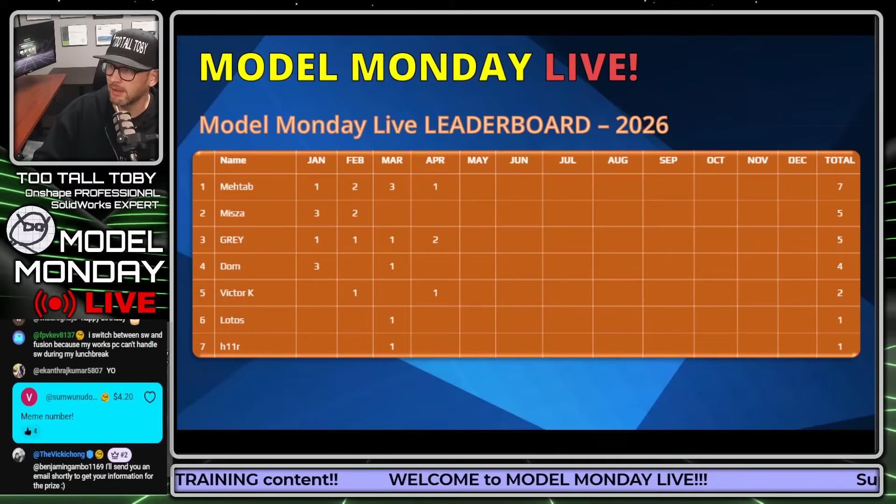So let's take a look here at this first challenge. I just want to warn you guys, this one is a little bit tricky. I think you guys are going to like this one. It's a fun one to kick things off here for this April 20th, this 420 challenge, but it's a little bit tricky. Watch the dimensions. Everything you need is there, but it is kind of a cool one. So let's get into it here.

As soon as I show the full print, you guys are going to be able to start modeling. So here we go in 3, 2, 1, go. And so the question here is, what is the mass of this part in 0.xxx pounds? This one is in inches and pounds. So what is the mass of this completed model?

So you can see here that the material is ABS. It's listed down in the title block. It's 1020 kilograms per cubic meter.

And you can also see here that the challenge, actually this is not a tier 1 challenge. I guess technically, actually, it could be. I'll leave it at tier 1, right? You could probably do this whole thing as one sketch and one extrusion, right? So that would make it a tier 1 challenge. So I guess we will leave it as a tier 1. You guys can kind of figure it out. You could definitely brute force your way through and do this all in one single sketch and one single feature.

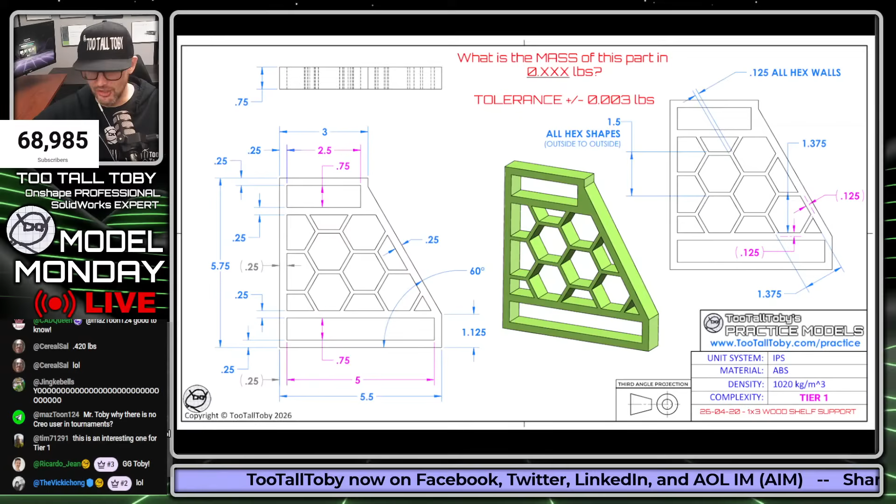Good start. Good start. There we go. That's the right direction. Maybe somebody just misclicked.

That was a test of the live feed. This is a cool model. I had a lot of fun doing this model, a lot of fun testing this model.

This is one of these things where you could print this out and it could become your own riser shelf. You could put some 1x3 down here, put 2 of them down here, and then put 1 of them up here, 1 inch by 3 inch, which in the United States we measure as 3/4 of an inch by 1.5 inches, or by 2.5 inches. So this one here would be for your 1x3 up in that top chamber. And then you've got yourself a nice little riser area. You could put some tools up there, some paints or things like that.

Still small enough that it'll print if you have a smaller print bed. If you have like the 150 by 150 print bed, you could still 3D print this. So kind of a cool shape. I saw this on one of the maker websites, I don't know where exactly.

Somebody had made something similar to this, but Tim says this is interesting for a tier 1. Yeah, I mean, it's complexity, not difficulty, right? So complexity-wise, you could do this all in one sketch. Realistically, you'd probably do it in 4 or 5 different features. At least I would. I would definitely break it up.

Instead of telling you how I would do it, why don't I just do this? Let's just do it, right? We'll do it, as they say on the internets, we'll do it live. Let's just do it live.

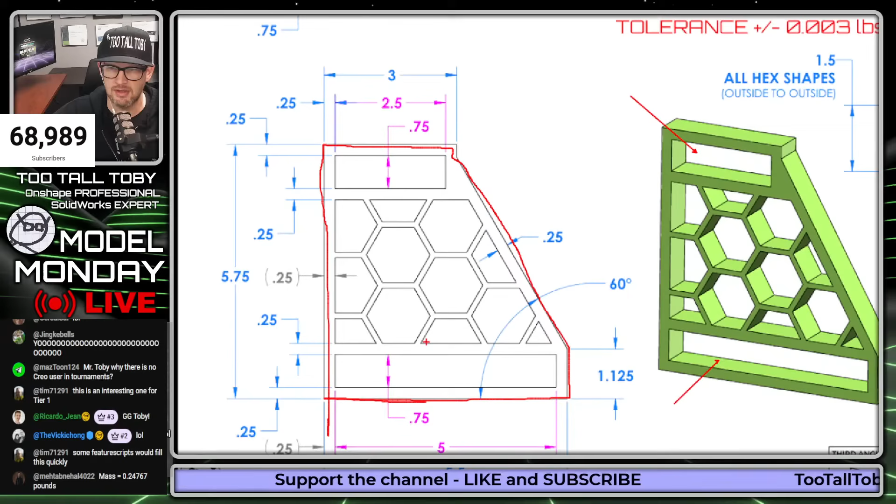So for me, what I would do here is, anytime I have a shape like this, I call it discretizing the model. What that means is I look at the challenge and then I break this up into different regions. I consider this kind of the outside shape of the model, so I would probably start out with that outside shape. Then I consider these pockets here the pockets for the wood planks, so that would be the next thing that I would cut into this. And then this area here would be like the pocket for the hex shape, so I would discretize that into its own shape as well.

Now you could do these all as the same sketch, or you could do them as separate sketches. The advantage to doing them as separate sketches is that a lot of times that allows you to keep your sketches simple, and when sketches are simple, they're easier to troubleshoot and easier to work on later. The advantage to putting it all in the same sketch is that sometimes it's easier to create relationships between the two. So you have a couple options, but I think I would probably just straight discretize this into different shapes.

So if I bring up my screen capture tool here, let's put this over here, and then we put this over here, just so I've got a view of that drawing. What this might look like is, in Onshape, I would come up here and say I want to use the correct unit system. So my workspace units here would be inches, and then my mass would be in pounds. Then I would go front plane, begin a sketch, orient my view, and then I would create that first shape.

So I would come up here to 5.75, and then over here to 3 inches, then come down with a little notch, over like this, and down until I'm horizontal to the origin. The cool thing about Onshape is that it gives preferential treatment to the automatic relationships being added before you add your dimension. So when I drop in this end point of this line and left click, then I can type in 1.125, enter, and it pushes the top of the line up instead of dropping it down below, maintaining that horizontal and vertical.

Tim says some feature scripts would fill this in quickly. Yeah, that's the way to go, do it with a proper feature script. There's probably an opportunity here to maybe use Vent or another feature script. Victor will have to let us know in the chat if he was able to use Vent or another feature script there from Onshape. It was super clunky, definitely wasn't the smoothest approach.

Probably the most popular fidgety type tool we have on there is the 3D printable hex bolt and hex nut. If you don't have one of these yet, check out the TooTallToby practice models library - we have these available for you to practice modeling, and then you can 3D print it. What's fun about this one is that when you first print it out, there's often a little bit of filament in the threads, so you have to cycle it 20 or 30 times, and then it starts to get very smooth and becomes a very addictive fidgeting toy. Definitely a cool one to check out.

A lot of times 3D printing people or structural people will say it's not right, it's not correct, you didn't print it in the right orientation, it's not going to be strong enough, it's going to snap off right here at the shaft. While I agree with those things from a structural point of view, you can't argue with results - this thing is very fun to fidget with. If you print these out and give them to your friends and family, they will agree, and they will also be fidgeting with these.

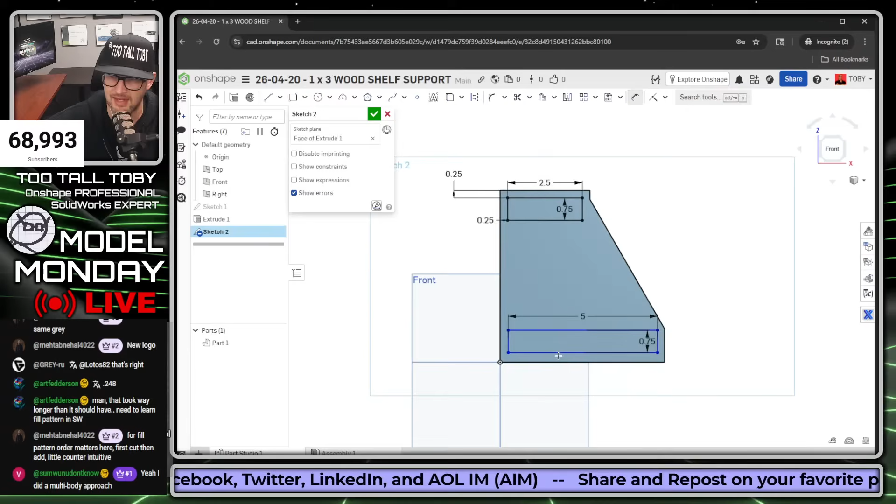It's really easy for me to create those shapes and then lock them into place relative to the other geometry when I've discretized that out, made the geometry a little easier to see and work with, not too complicated, not too many entities. When you get too many entities in one sketch, that's when things tend to get a little dicey.

So that's what you want to avoid, having too many entities in one sketch. If you created something like this, it would be easy to take that shape and do a remove, making that remove through all. So this feature might be called main shape, and this one might be called pockets for boards, or pocket for planks, something like that.

Then we could easily get in here and create this final shape. This one's just going to need dimensions and sketch relationships. So this line here and this line here are going to be parallel to each other. This line here too — I thought it was Shift B for parallel, but it's just lowercase b. And then the remaining lines are just going to have the relationship of 0.25.

So even though it takes more features, this is definitely the way I would model up something like this. It's not only going to help you get your initial shape in place, but it's also going to help make it easier to rework this thing, and having these discretized features makes it easy to link them to a variable table or something like that, just because they're discretized.

So this could be called pocket for hex, pocket for the hex shape. Now we get into the hex shape, and this comes down to each person having their own style, their own approach. For me, whenever it comes to creating any type of pattern, I always end up making the pattern oversized — imagine each of these other things I create is going to be a hex in the pattern. I always create it oversized, where it overfills the pocket region it needs to fill, and then I cut away the excess geometry.

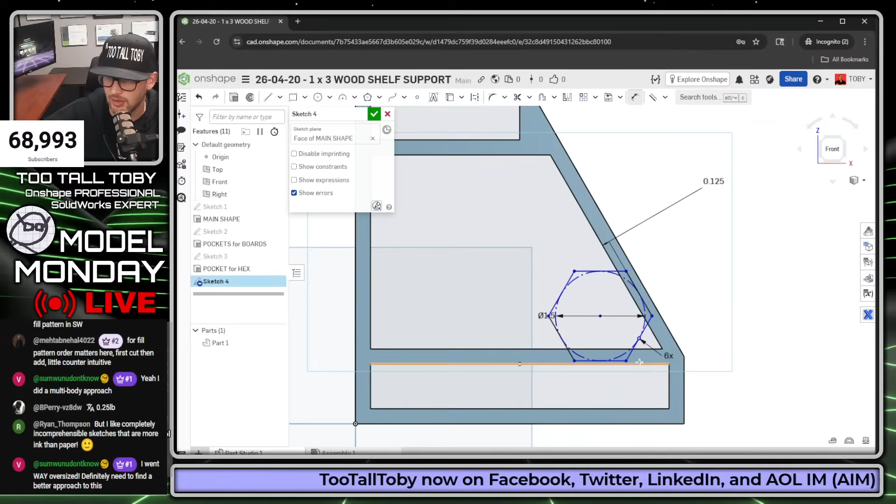Add that parallel relationship again, and then add in my dimension here — from this line to this line, that's going to be at 0.125. So that's the overlap for the hex, and the dimension here is 0.125. Now look, that hex is nice and fully constrained.

Now, a little pro trick here: if I know I'm going to be creating a hex type of pattern, what I'll typically do is get in here and add some additional lines. These lines are going to assist with my pattern — I could create a line here like this and a line here like this, and we'll see how those are used in just a moment. I might choose to make those lines construction, but that's a lot of times what I'll do when getting ready to create some type of hex shape.

So now that I've got that shape ready to go, I'll extrude it, but using the thin option here, and then I'll pick on that sketch 4.

So that's going to get extruded thin. What's the wall thickness? 0.125, and that wall thickness is going to the inside.

And then what's the depth of this thing? Well, I could make this depth up to surface, so this could just go here for the depth. I can make this up to surface or up to vertex. I'll make it up to surface here like so. And then I'm going to say that I want this to be a new part in my parts list.

So down here, I've got this parts list, and you can see that because I chose new, I'm ending up with a new part here in this parts list. And so this is kind of a good way if you know that you're going to overfill it and then need to cut it away. This could be a good way to do it.

It also tends to make it pretty robust, because if the pocket changes sizes and you need to overfill it more, the cut still works, at least in my experience most of the time. So hit the green check mark. There we go, that gives us that shape.

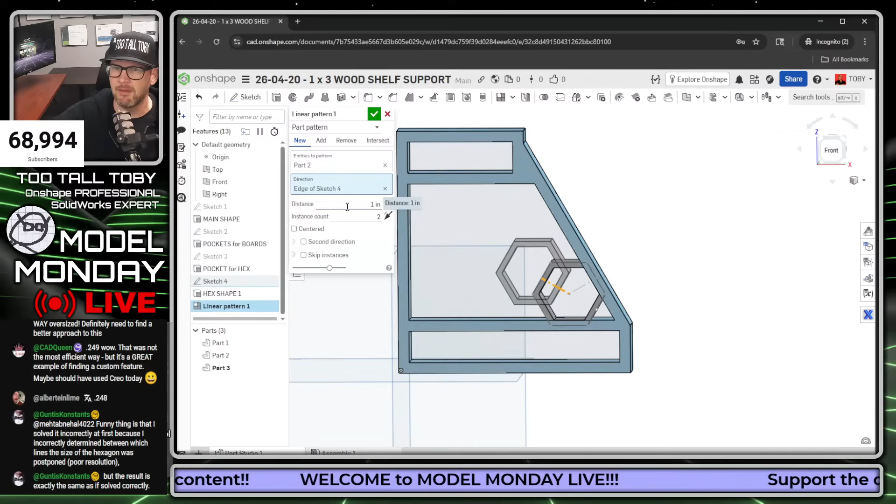Now, the pattern's not going to be at 1.5, because that would be like a double wall thickness there. It's going to be 1.5 minus 0.125, so 1.375, 1 3/8. So that gives me the direction of that pattern.

And then I just need to put in enough instances that this thing fills or overfills. So for example, I could put in 5 instances of this thing, and that way it kind of overfills.

And so now that I've got that shape in place, what I would do here probably is I would just finish that pattern and then make another pattern. So create another linear pattern here of all 5 of these. Okay, so we just grab all 5 of those bodies.

And then for the direction, now we can go in this direction, the second direction from our layout sketch, which is going to the midpoint of the hex. So the second direction for that layout sketch. And then the distance, again, is going to be 1.375.

And the cool thing about Onshape is that you can choose this option for centered, and that way it pushes it off in both directions. Now, again, this is kind of overfilled.

I am kind of future-proofing this a little bit, because if that pocket ended up getting bigger, I'm giving myself that flexibility, that reusability. So if I wanted to make 3 or 4 different sizes, I could overfill this and accomplish it that way. There's more than one way to accomplish it, but this at least gives me play for a little bit of a larger pocket here.

Maybe what I could say in my planning here is I could say, well, I might end up with a situation where I've got 3 boards across the bottom. Each one of the boards here is 2.5 inches. So maybe I want to account for having 3 boards across the bottom and 2 boards across the top. So in this scenario, it looks like I'm pretty much accounting for that.

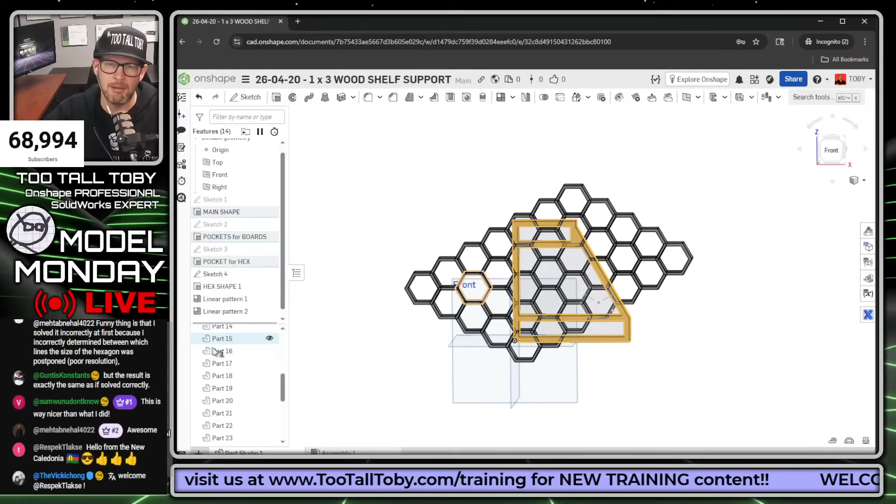So once you've got that stuff in place, what I would probably do at this point is just choose to union this to make it a little bit easier to do my cut. I mean, you could do it the other way with an intersect. That would certainly work as well, but we would want to do an intersect and not include this body. So maybe what I would do at this point is just take everything other than this first body.

So this first body here, or this first part in the list, this is the main shape. So if I rename that to main shape body, now what I can do is take the rest of these. Pick the first one, hold shift on my keyboard, and go all the way down to this bottom one. Then right click, and choose union, Boolean union. So that combines them all together into one single part.

And now what I can do is take the sketch that I had originally used here, or I could even just pick in this region. This is the cool thing about Onshape, is that it does a good job of letting you just pick a region, but I could also just go to that earlier sketch that I created. So this is the pocket for hex sketch. I could take this sketch, which is the one I used for the pocket for hex, and then do an extrude.

So now you see I'm doing an extrude from that pocket. Just to make it clear what's happening, if I change this to a solid and choose that sketch from the pocket for hex, you can see here what that region is that I'm extruding. But instead of doing it as a solid, I'm going to do it as an intersect here.

And then for the intersect, I'm going to choose to merge with part 2. That's this part here. And then also I'm going to choose to merge with this. There's one extra little part that's hanging down here that didn't get included in that union. So let's see if I can merge it with both at the same time. Ooh, not going to let me merge with both.

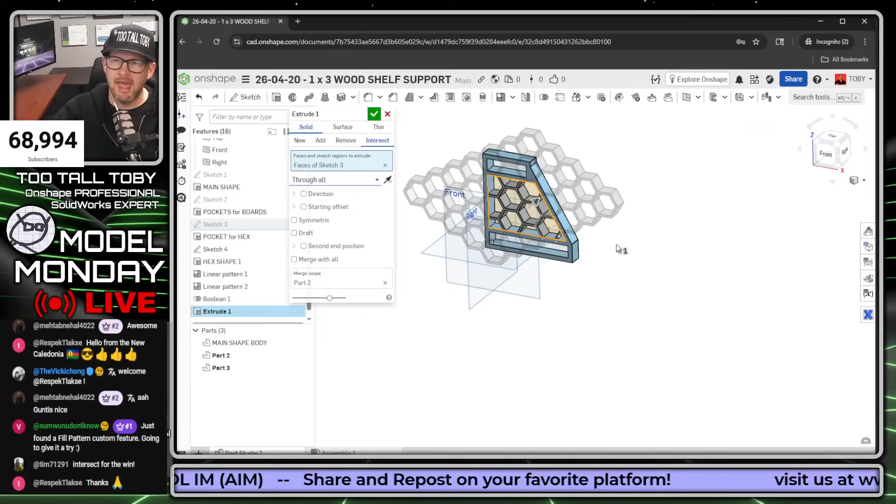But watch what happens here. So we take this sketch, the sketch from the pocket for hex, we do extrude, and we're going to say this is going to be an intersect, so solid intersect. So we pick that sketch again. And now what's happening is that we're able to take that sketch and say we want that to go through all. And anywhere that extrusion intersects with this other part, we want to end up only keeping what's overlapping and omitting everything that's not overlapping. So then we hit the green check mark there, and boom, there we go. There is our hex pattern filling in that shape.

And in theory, if we were to now take this original main shape and make a change to it, let's say we change this from 5.5 to... Here, I'm going to take this dimension and change it to a dimension from this side so that it just grows out the side. So we'll make that dimension 2.5.

And now if I take this 5.5 and then change that to like 7.5, in theory, the hex should update. Yeah, look, see it updated there. That's what we like. So if we take that 7.5 and then we change that back to 5.5. So that would go up to 8, right? If we were adding 2.5 to it, it would go up to 8, and that would give us enough room for 3 boards.

This one's a static dimension. I should have made that off of that side as well, but you get the point I'm going for here. The hex pattern updates automatically, and that's what we want. Yeah, exactly. Parametric final boss.

Exactly. All right, so now we can merge these together. Right mouse button, Boolean, just like we did before. And then we can right click and say assign material. The material in the title block is ABS, so we go in here to TTT custom materials, we go to ABS here. It's got the material density of 1020 kilograms per cubic meter.

And so now if we go in here to measure the mass of this thing, we're coming up with a mass of 0.248 pounds, 0.248 pounds. And let's see if we got it correct. Who got it correct here?

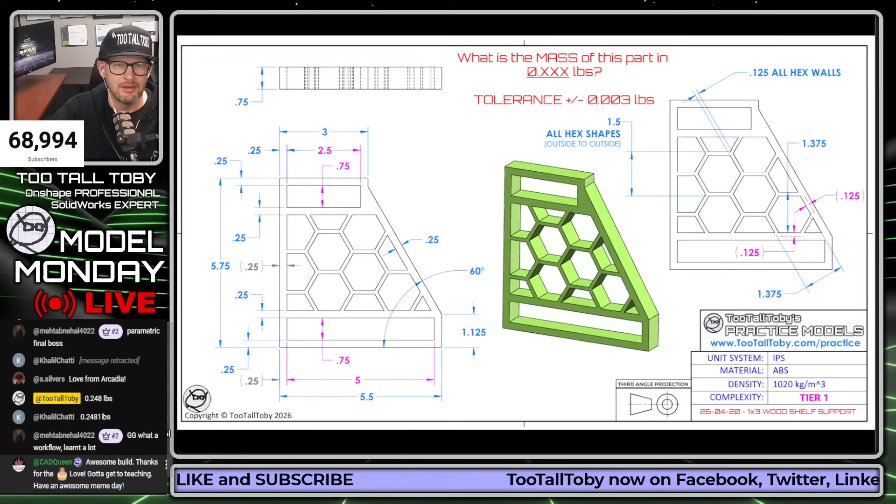Kate, the CAD Queen, thank you for joining us here. And of course, we are going to have another challenge for everybody in the chat here in just a moment. But in the meantime, I wanted to just find out here who got that one correct. We always find out here who got this one correct. Let's bring the chat out and see who got this one correct.

All right, so for this one, the correct answer is 0.248 pounds. That is, in fact, the correct answer. So we got it correct. Let's go. Serial Sal was the first one who came in with an answer.

And T. Luss, who was competing last week, he's going to be in the highlights this week, comes in with 0.248. Victor K, 0.248, very nice. Getting that weird symbol next to some of these answers again. And Harass came in here, 0.253. Nicely done, a little bit high, but nicely done.

And Adonis came in with 0.254, a little bit high. Maybe we'll see him revise his answer as we go down through. And 2Dive today, 0.296, it's a tricky model, right? And Aras came back in, 0.248. Nice. Guntis, 0.248, very nice.

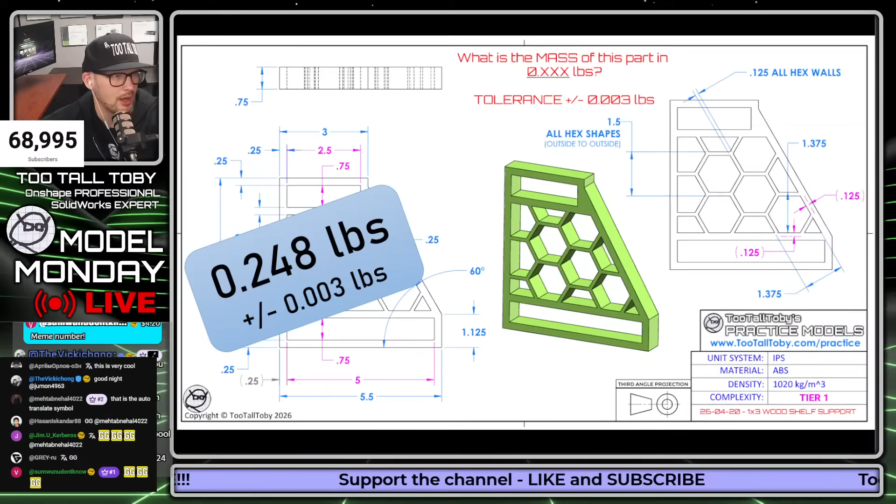Oh, you're welcome. Thank you for tuning in today. You are very welcome, my pleasure. Thank you for the awesome tutorial.

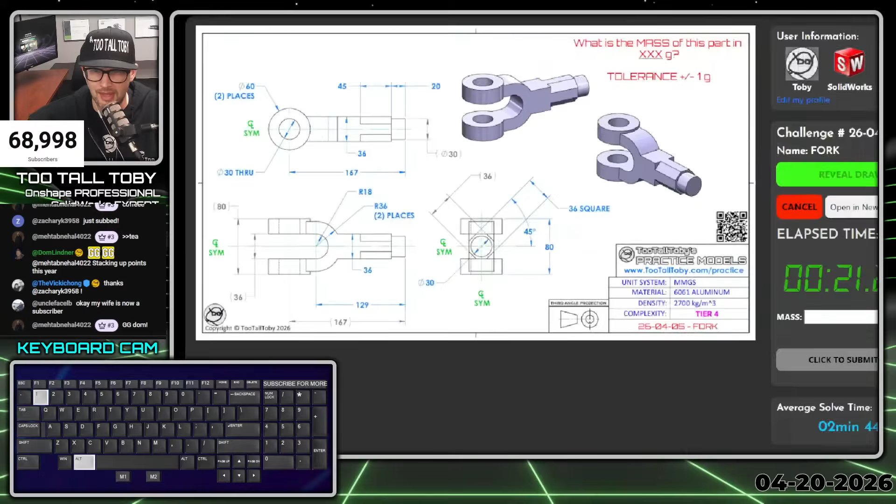Looking at this model, it seems like this circle here is acting as the anchor. There are a lot of dimensions coming off of that anchor, like the center of these holes over here, and this 20 here too. Then the 45 is coming off of that as well. I know that end shape is circular, but the rest of this is pretty blocky.

So I think what I'm going to do is make my first sketch look something like this. I'll come off here with a centerline going up through the middle, then create a line that goes all the way out to the center of this circle here, at the 167 dimension. Then I'll come back with that kind of fork shape down, back around to here, back over to here, over and down. That's going to be my very first sketch.

I know that might look a little weird as a first sketch, but what's nice is that if I just draw in another line here, I can use that first sketch as a revolve, and take that first sketch and revolve it into this circular shape here.

So that's going to be my first sketch, and once I have that in place, I think I'll be ready to create this sketch here for the 80, for these two circles that extrude up through. I'm kind of tempted to just create that sketch at the middle and extrude it out 80 midplane, or extrude it 40 midplane, because then it'll be easier to hold the customer's design intent. We'll see what happens there.

Once we get to that chamfer, I'd love to make it with a partial chamfer, but the problem is it's dimensioned kind of weird, fitting into a 36 millimeter square. So I'm not really sure what that chamfer is going to end up being. I know it's at 45 degrees, so I'll probably just draw that triangle from the end and then mirror it twice, and I'll be done with that model.

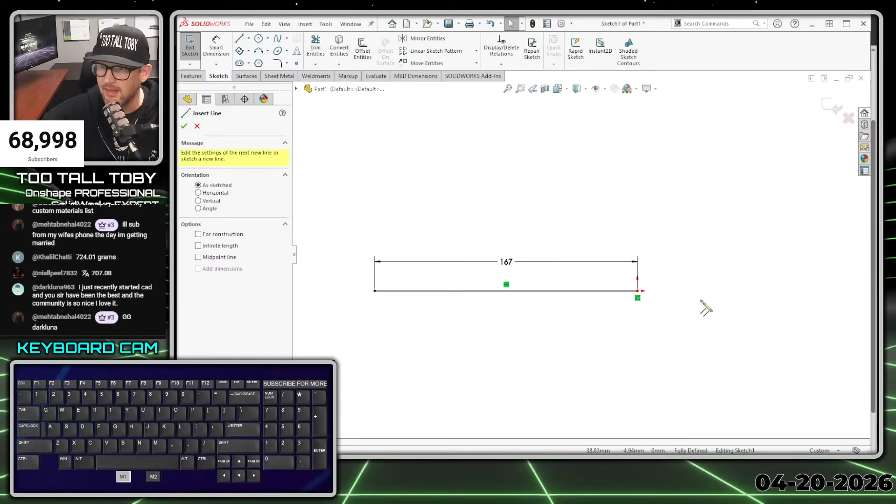And I'm going to come up to a height of 30/2. Then I'm going to come over in this direction, 20, and then come up kind of an unknown amount. Then I'll come over in this direction, and this is going to go over to - I mean, really at this point I could probably bring this one over to 45 to act as the depth of that cut extrude, and we'll see how we can use that a little bit later.

And then I'll come over here, kind of an unknown distance, and then I'll hit escape, and then come up to the kind of outer shape here for that arc and come over, come away, come back, touch the endpoint, and come down like so. And then I'll come down like so, and then I'll do the same thing with the inner shape for that arc - come over here, come back, touch the endpoint, come down like so, and this one's going to come all the way down to the middle.

Now we just need to add in some relationships, and this is where it's helpful to practice and learn what exactly you need from these different relationships. For example, this point needs to be coincident to this line, and this point needs to be coincident to this line. We could choose to either make these two concentric, or do that with the arc dimensions. I think we'll just make these two concentric, and then we'll go in and start adding our arc dimensions.

So this arc here is going to have a radius of 36 for the - oh sorry, that's the inner one. This one is going to have a radius of 18, and then the outer one is going to have the radius of 36. The sketch is a little tangled up right now, but I think this should untangle it. There we go. And then we can add in a dimension here for the width of this thing.

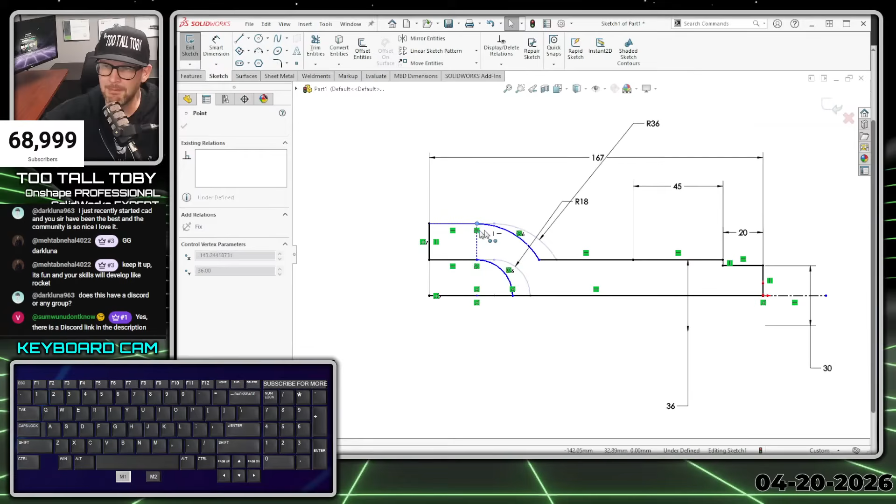Even if we have a lot of experience in 3D CAD, if you end up with an underdefined sketch, just hit escape, grab a blue point, and start dragging it around. A lot of times that'll help you figure out what is underdefined.

So I'm going to create one final dimension here that goes from the origin to the center of this arc, and that dimension is going to be 129. And there we go, all black, fully defined sketch. That's what we like to see.

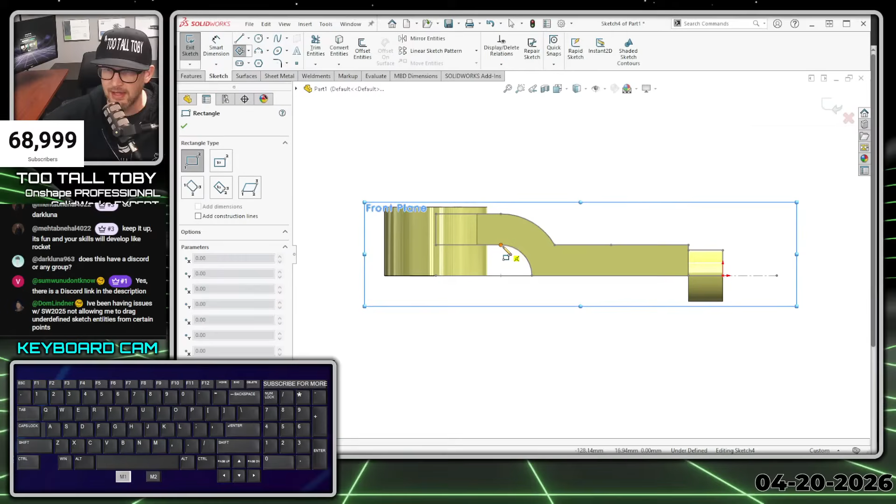Then we could go back to the front plane, and use the front plane here and some of that geometry we already have to get rid of this final shape. So we could go from maybe here to the silhouette edge, hit escape, grab this point, and drag it down to this lower edge here. Now you have a nice fully defined sketch, and you can take that and S key extrude cut, right click through all, both, right click.

So that takes care of the majority of the geometry. Now the only thing really left to do is add in those little cuts on this side. So pick this face, begin a sketch, S key, line, create a line here that comes over, down, up. Give that line a dimension.

Maybe we could create a construction line here, or we could do it from the top plane as well. We'll do another construction line because we're going to mirror that geometry in a moment. We'll give that line a dimension of 45 degrees, and then we could take that geometry and mirror it. That was using the sketch mirror command. Now I have the sketch mirror command included in my context menu, so when I select multiple solid lines, I'll show you this with a circle and a construction line here.

When I create multiple solid lines and one construction line, I can just go right in here to this menu. If you want to get that functionality, just do the same thing I did here. And when you go to this menu and mirror is not showing, right click and choose customize, and then you too can add that.

Look at this, we're at 69,000 subscribers, guys. What a beautiful day it is. 69,000 on 420, that is a beautiful thing. That's got to be meme worthy right there, right? Maybe if I move this down here. 69,000, 420. Let's go, let's go, let's go. That's what it's all about, baby.

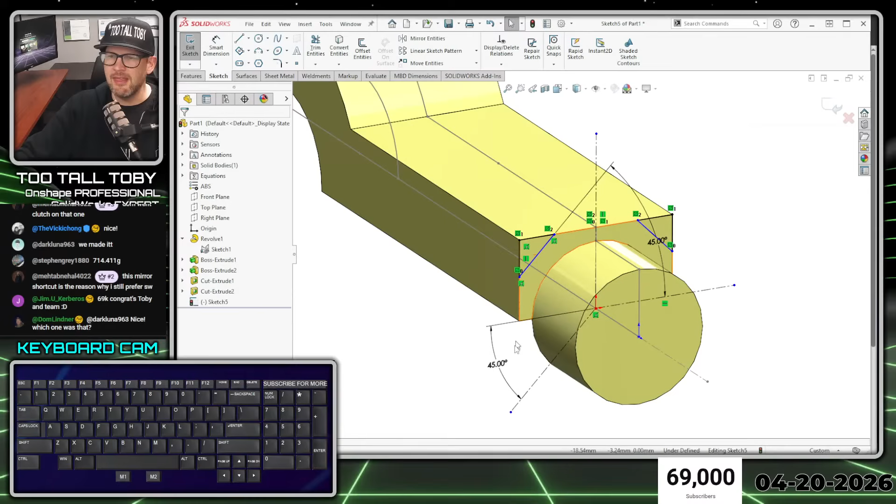Whoops, why did that go driven? Try that again. From here to here, cross over. Nope, that should be driving. Oh, I think because, yeah, actually I do know why that is. It's kind of a newer thing that SolidWorks does, I think. Maybe it's not that, maybe it's always been there.

But basically when you create a linear dimension between a line and a line, if they happen to currently be parallel, then SolidWorks automatically adds a parallel-like relationship, kind of embeds a parallel relationship in the distance dimension, and then that 45 degree dimension is technically over-defining because it doesn't need to be 45 and have that linear dimension. In other words, when I added that 45 and this one here has a 45, when I go in here to add a dimension and select this line and select this line, SolidWorks sees that they are currently parallel, and when we add that dimension, it kind of locks them together as parallel.

So I don't have to worry about that angled line becoming not parallel in the future. So now when I go to add this dimension, it becomes over-defined, and then that dimension automatically becomes driven. So to look at this a different way, if I get rid of that 45, you'll notice that this line is blue, meaning it's under constrained, meaning I could just grab the endpoint and drag it around and change the angle of that line.

Well, this line here has got a dimension on it at 45 degrees driving. So now if I went to the dimension command and create a dimension from this line to this line, that construction line is going to become black because the two lines are currently parallel. And when I add in the driving linear dimension, it's going to also kind of embed a parallel relationship in there. So it's a little bit nuanced, but it does happen in SolidWorks.

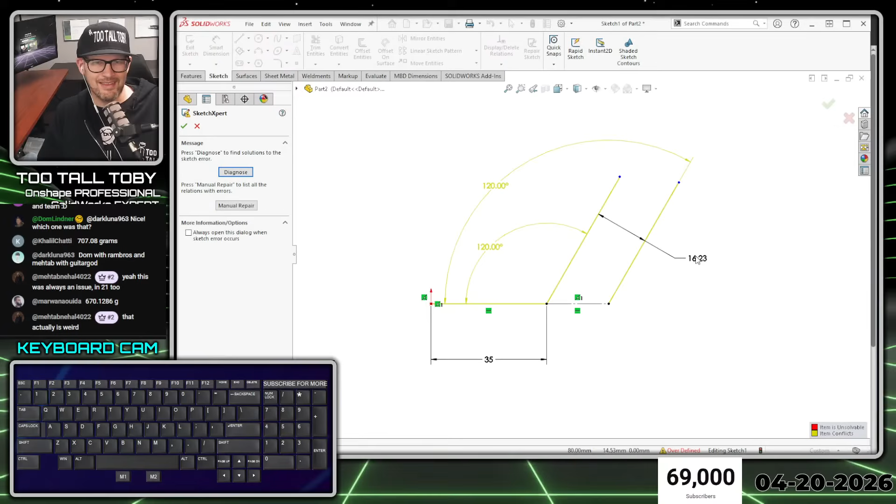Yes, it would. Why would that dimension go over defined? How come I can't just define the distance between these two lines? I should be able to define that, right? I try to put a dimension on here and it keeps going driven. So I say no, not driven, make that driving. Now the sketch is over defined. Why is it over defined now? Yeah, that is weird. This is always an issue, Matab says.

Super intuitive. Yeah, exactly. So it is weird that happens because you'd think now you'd be able to define that.

But the reason you can't define that is because when you add a linear dimension from this line to this one, it kind of imposes a driving parallel relationship. The CAD system doesn't want you to later grab this point, drag it, and change the angle of that line, so it imposes an embedded parallel relationship. If I get rid of the angle dimension, now I can make this fully defined with just the one dimension, even though I never defined the angle, because the driving linear dimension imposes a parallel relationship.

That one always catches me a little off guard. Sometimes the workaround I'll do is instead of defining the dimension to the line, let's say we had that scenario where this was 45 degrees driving. Instead of creating the dimension to the line, I'll just pick an endpoint, then still pick the center line, and go across, because it still lets you make that one driving. So it's just a little workaround if you're ever in this situation.

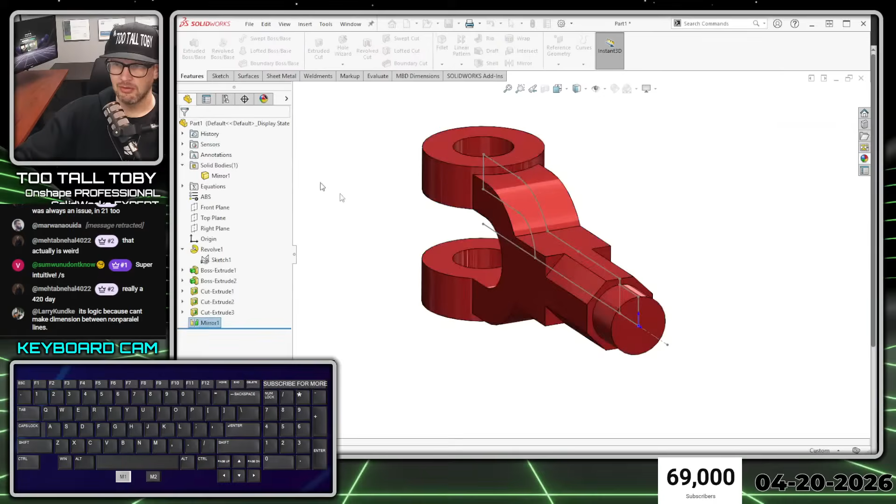And this is supposed to be made out of 6061. So we right click and assign a material here, edit material, or just make it 6061. There we go. Let's take a look at our sensor here, Control Q, and we are coming up with a mass of 707.077 grams.

So now we go back into the app at TooTallToby.com and attempt to type in that answer, 707.077 grams, and enter. And yes, we did it. We got it correct, and we got it correct on the first try. Let's go, let's go, let's go.

And that is it for that tutorial. I hope you guys enjoyed that SolidWorks tutorial. We got to learn some kind of cool stuff there. Even though it's a simple part, we still got to get in there and learn about that over-defining dimension scenario. It's kind of an interesting scenario that can creep up. And we got the answer correct.

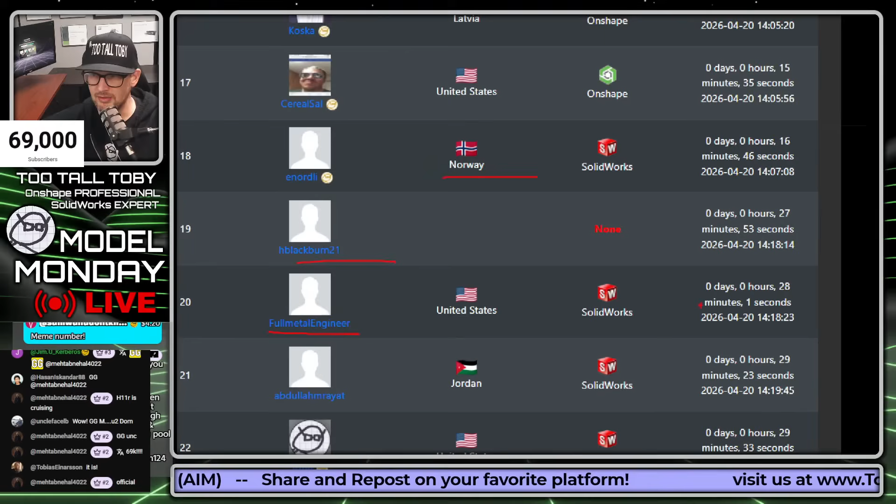We got H. Blackburn in here, 27 minutes 53 seconds. Full Metal Engineer using SolidWorks, 28 minutes and 1 second. We got Abdullah from Jordan using SolidWorks, 29 minutes and 23 seconds. And bringing up the caboose, we got TooTallToby, 29 minutes and 33 seconds from the time it was shown.

Very nice guys, well done, well done. Good job Matab, GG to Matab. Well done, well done, 3 minutes and 18 seconds.

Uncle Facepound says he's taking the dog to the vet. Peace everyone, goodbye my friend. Good luck at the vet.

All right guys, here we go. Congratulations to everybody who finished that. It's not easy to finish these challenges, whether it's that one or whether it's the first one that we did. It is not easy to finish these challenges. So well done, well done.

Look at this, Matab and Dom have posted a video of their speed run. So if you want to see this speed run, look at this SolidWorks speed run, 2 minutes and 4 seconds. Click in here to TooTallToby.com and you can just click on the link and watch the video. Let's watch this video of his speed run, let's see how he does it. Sounds like I'm talking in the background while he's speed running it.

Let's see here guys, let me move this over a little. All right, here we go. Starts out with the circle. Interesting, 72 millimeter circle, I don't even think that's a dimension that's in the fork. Where's he getting that? Is that one of the circles? Where's he going with this? What is he doing here?

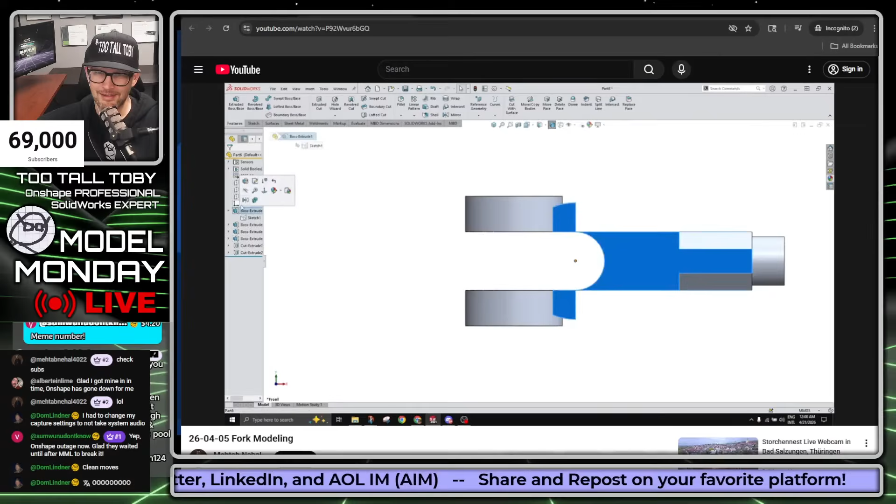Oh, he says, no, I'm not done yet. Wow, so it could have been even faster, huh? Look at this guy, he says, okay, no problem, no problem, Toby.

I got you flats. Wow, clean. Bro, that was pretty sweet, that was pretty darn sweet. Well done, well done, zoom. Yeah, that is cool, that is very cool.

All right, let's see what Dom did, see how Dom did this one. All right, here we go. It's got some nice templates set up, I like that, approved. It's got the clock on screen, I like that too, approved. 36, yep, that seems a little bit more.

Not so clean, no, but good fix. Yeah, exactly, very nice fix. Oh, that's cool, put the 36 in there to get that kind of initial shape running around. Mirror across a plane, okay, I like that. A lot of SolidWorks users might miss that one. I like that.

Okay, dimensioning out to the end of that fork based on the... Let's see, what is this based on? I like Dom's precision here for these dimensions. Let's go, a little 6th place on millimeters.

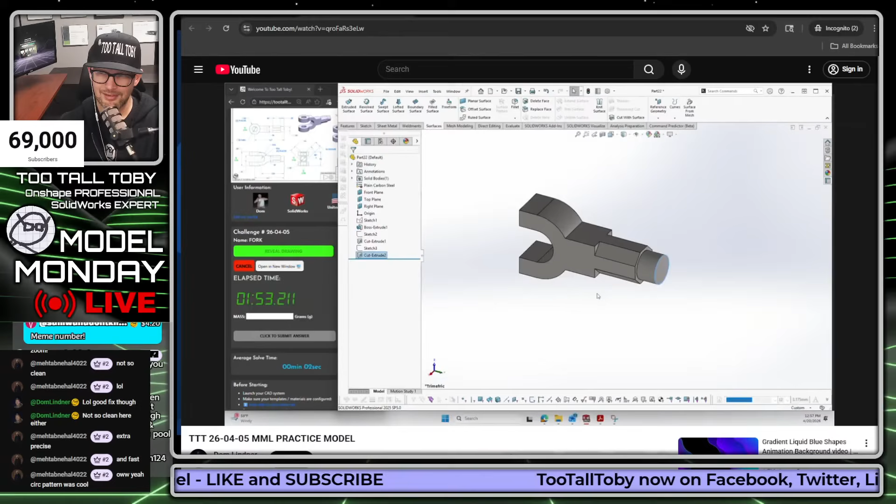Oh, and then cut it away. Yep, that's nice, that's really nice. Cut that away at the end. Now here's the question, what do you do with this extra circle? Can you do some kind of a delete face? Oh, he only put it out far enough that it wouldn't be in the way. Wow, that's good, that's really good, I like that.

Very, very nice, yep, that's good. Assign the material, look at the mass, 707.077, very nice, wow Dom, sweet. Awesome, guys, Metab, Dom, like. Let's go.

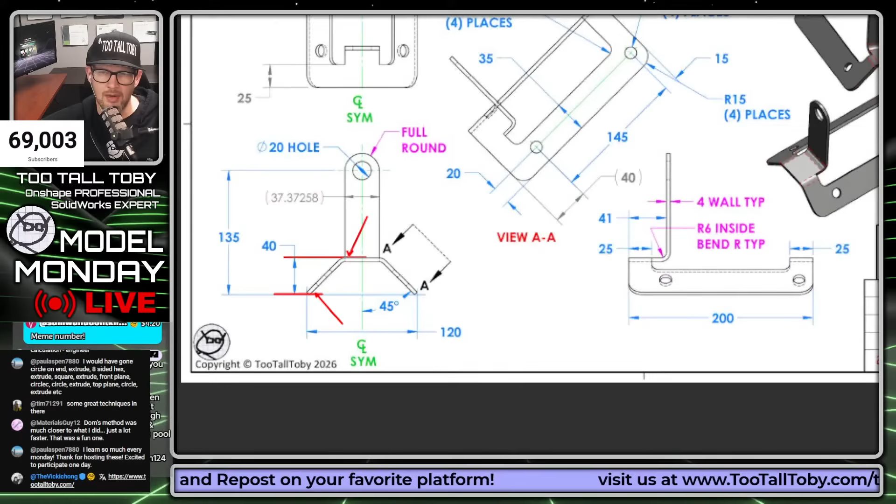Now, what gets tricky about sheet metal is that sometimes you run into scenarios like this where the dimension is to the outside of the material here, the inside of the material down here, this 40 dimension, and we don't have both outside and inside in our sketch. But that doesn't mean we can't make that work - we can always derive the outside and inside dimensions from our sketch.

So let's give this a try. We're going to try to create that shape first, extrude it down the length of the part, and then kind of hollow out the inside of the part, this shape here - a hollowed out shape - and then we'll add in that bend along that top edge of the part.

So I'm going to say open in a new window. This gives me the drawing in a separate window that I can move to my second screen, and we're going to jump into SolidWorks.

Let's see if we can solve this thing in under the average amount of time. And of course, if you guys want to play along, you're welcome to look up this drawing and attempt to model this right along with me. We'll see who can model it the fastest. I'm going to try and model this in SolidWorks, and we'll see how long it takes.

So we're going to go in here to new. We're going to choose to create a new document using our millimeters template. And we're going to try to create this shape here from the end of the part.

That means we're going to use some offset geometry to create that full shape. I'm going to go into the front plane, begin to sketch, orient my view, and create this kind of line over and this line down like so. Then I'll hit escape, take that geometry, and mirror it.

Then I'm going to take these lines and use the offset entities command to offset that geometry. One thing I really like about SolidWorks is that when you do that offset geometry, you can say you want that offset geometry to immediately become construction. You can also say you want to cap ends. Learning how to use these tools - offset entities, cap ends, and construction options - will really save you a lot of time when you're working in sheet metal, because you can cap the ends with arcs, but you can also cap the ends with lines.

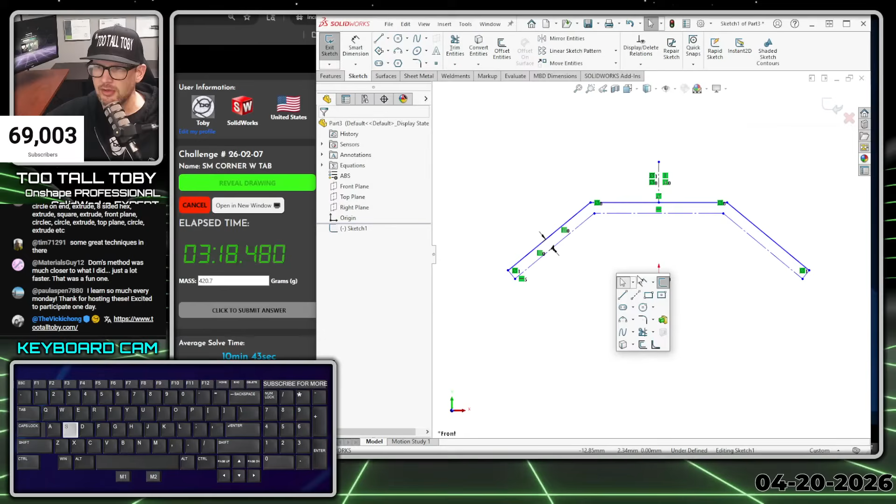We can do S key dimension and create a dimension from the top plane to this line up top here, or from the origin to this line. That dimension is going to be 40. For the max width here, from this point to this point, that dimension is going to be 120.

We've got an angle dimension. So again, we can click the top plane and then click on this line here and then put in that angle dimension of 45 degrees, and boom, that sketch is fully defined and ready to go for our sheet metal application.

And that's the cool thing about using offset geometry, is that if the customer gives you some kind of mix and match of inside to outside, you can just offset the whole thing and make that the wall thickness of the sheet metal, and that's really going to set you up for success.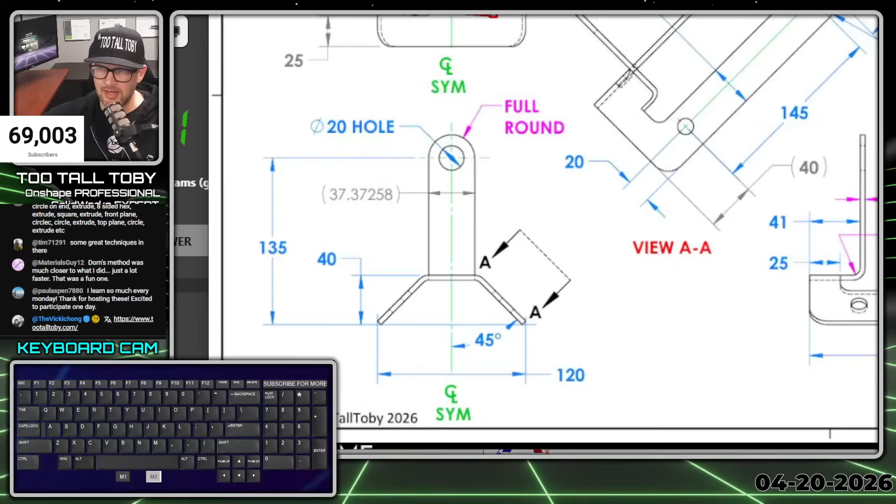But I think what might actually make more sense would be if I were to create that sketch here, looking in on this thing from the end. So either create a sketch that looks like this, or I could even create a sketch that just kind of comes down like this, comes up like this. You know, honestly, it could even just be a triangle, right?

And we could just cut down the length of that sheet metal part. So maybe the better thing to do would be to create a sketch plane at 25 millimeters and then create this shape and then cut extrude that along the length of the sheet metal. So let's give that a try here.

So we go here to our front plane. You put your mouse over the border of the plane. When you do that, your mouse is going to become a little 4-way arrow. And then what you can do is you can hold control and drag that. And then once you do that, hold control and drag, you can bring that out to a depth of 25 millimeters, enter.

And now you've got a new sketch plane there. Pick that sketch plane, begin a sketch, orient your view. And you can create a sketch here that looks like, like I said, it could look like a triangle or like half a triangle. We could make this a mirror here.

So we could have this look like a triangle here, like so. Take that line, make it for construction. I have my for-construction mapped to Q, same button as in Onshape, so I mapped that to Q. Then I can select that geometry and mirror it across. And now I could take this line here and this edge here and make those perpendicular.

Okay, and oh, I probably didn't actually want that relationship to the origin. That was a misclick there. Let's see, is it that one? Yeah, there we go. So I didn't want that to be on the origin because that's going to have a dimension, and the dimension is going to come from this edge down here to this line here. So that dimension is going to be 35 millimeters. And then for that top line, I don't really need a dimension to the top line.

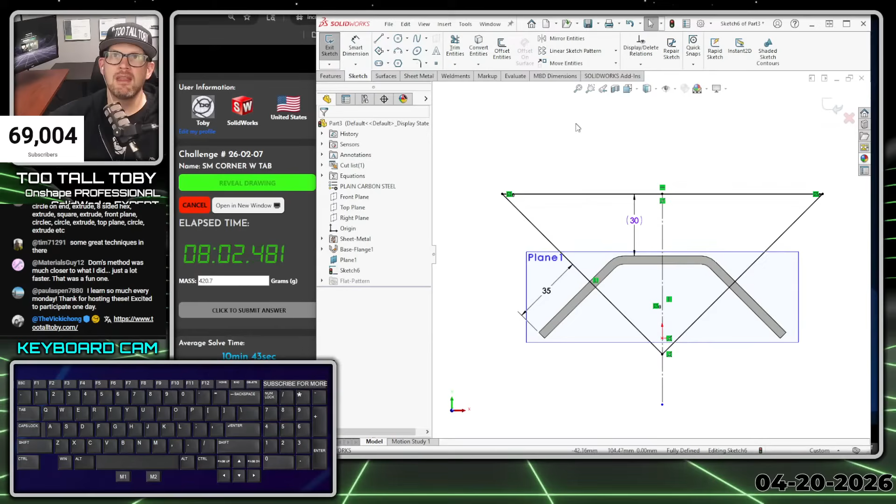So now that sketch is going to have a depth of up to 25 millimeters off of this end here. So I could take that sketch and do features, extrude cut, and that's going to be offset from surface. The surface it's going to be offset from is this surface here, and the offset distance is going to be 25 millimeters, 25 from that end as well. Enter, enter, and boom, there's our cut in our sheet metal part.

So now that we've got that cut there in the sheet metal part, now we're ready to create this flange that is sticking up here. This flange is sticking up here. And it looks like that flange actually has kind of an offset to get to the location of that flange. So there's a couple of ways you could do this, but probably the easiest way to do it would be to just create a, let's see here.

Looks like it's using the same width, yeah, it's using the same width here as the tangent, the tangency from the arc. So probably the easiest way to do that geometry would be to just create a tab that's sticking out from here. So I could pick this face here, begin to sketch, orient my view, and then I could create a rectangle here that goes from this edge to this edge.

Let me go here, view, display, tangent edges as phantom. So I'm creating a rectangle here that just goes to the exact width of this tangent to this tangent here. And then I'm coming over with that geometry and bringing that geometry out. And then that geometry is going to have a depth here of 41 millimeters, 41 millimeters. Now, what you'll notice here is there's a little trick you can do when you're sketching rectangles in SolidWorks.

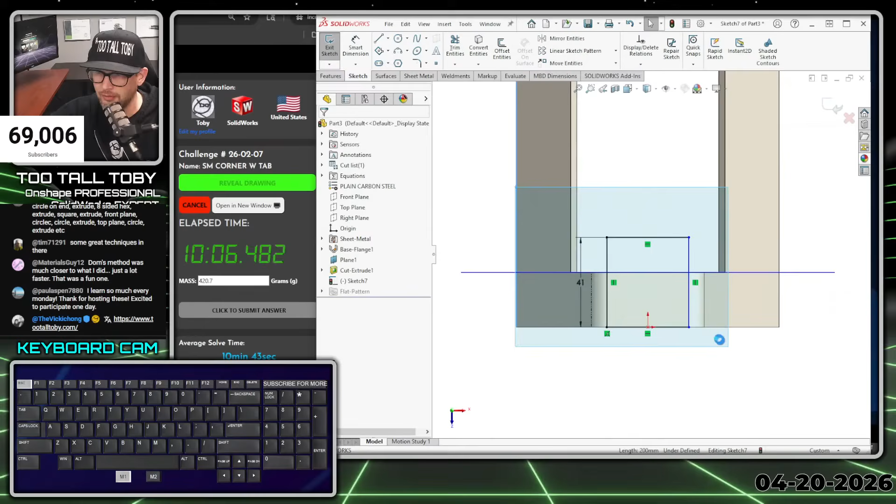You could go from this corner to this point over here along this edge, and then without typing in a dimension here, you could type in that 41, enter, and then for this dimension here, you can just press enter again, and sometimes that'll actually give you that as a coincident relationship. It actually didn't do it this time, I kind of lost that workflow. So let's try it again, let's see if we can get it on the second try here. So from here to here, this one's going to be 41, enter.

And then what if I tab off of that one and just press enter? There we go. It still didn't give us that coincident. Rats. So you're still going to have to add that 41.

The way I would probably do it is draw the rectangle like this, and then jump into dimension and add in that 41 as a secondary step. This is where you go through these workflows and practice them over and over again until you keep getting faster and refine those workflows, and then you can use them in the next model and the next model.

So now that I've got that shape there, I could go to sheet metal and go to tab. We'll exit that sketch, and then turn that into a sheet metal tab. So base flange tab, turn that into a tab, hit the green check mark.

Now I can click on that edge, and then go into an edge flange command here. So here's edge flange to bring that up. You'll see that when you're defining the edge flange location, the flange position, one of the options is to use the inside flange position. The inside flange position is tangent to the original geometry that was there, and that original geometry is that 41 we dimensioned when we created that tab. So that way you get that tab to come up at exactly the right spot.

Learning about these flange positions when you're doing sheet metal is really key. It's going to allow you to quickly get in there and create the exact geometry that you want.

Because we've got the other one here, one material to the inside, flush, one material to the outside, entire bend to the outside. So if we know we want it to be this one here, flush, then we could click Edit Flange Profile, and create the rest of the geometry for this flange.

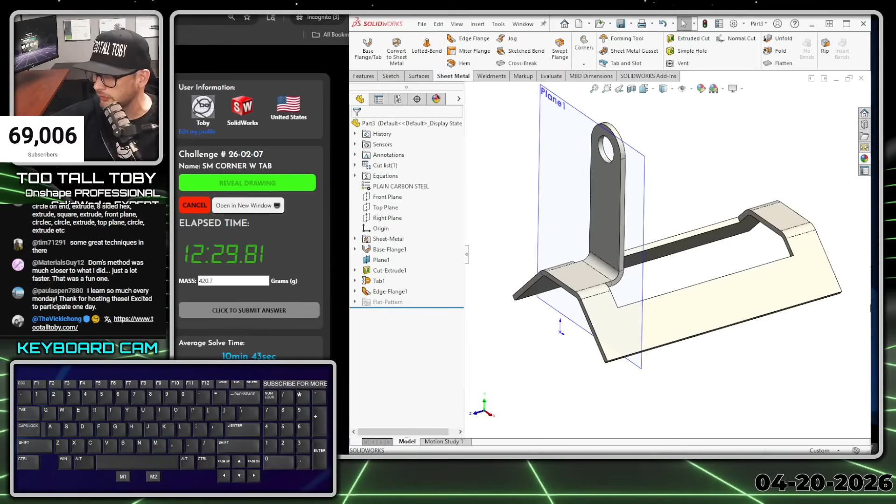And now the final feature that needs to be created here is just the holes. There's a few different ways we could create these holes, but I would probably use the rectangle trick, meaning I would create a sketch of a rectangle or maybe a construction line. I would create a sketch of a construction line that comes up to a height of 20, comes over to a distance of 15, then over to a distance of 145, and then I would have the perfect location for those circles.

So pick this face, begin a sketch, orient our view, S key, construction line, single click, move our mouse up. This is going to come up to a height of 20, enter. Move over in this direction to a distance of 15, enter. Move over in this direction to a distance of 145, enter.

Then S key, circle, and we can drop in a circle here with a diameter of 13. And then we can drop in another circle here with a diameter of anything, and take these two and make them equal. Then S key, extrude, and that's going to go through all. Now we got those holes in there, and then we can take those holes and this plane and choose to mirror and enter, boom, mirror that across.

And so now the final features on this thing are just those fillets, right? We got the 15 fillets on the outside and then the 8 fillets on the inside. And so with sheet metal, whenever you go to do fillets, you always want to go into corner here and do break corner, relief trim.

And that makes it easy to pick these corners. You just kind of get in the area of those corners and you can pick them.

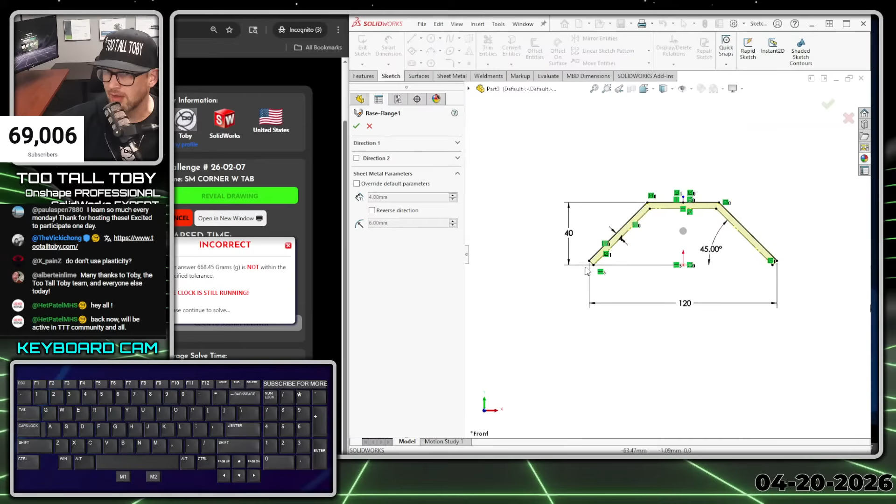It is 4 millimeters, our bend radius is 6 millimeters, and we've got 120 max, and we've got 40 from the base up to there. So that all looks good.

135 up to that hole. 135, 20 millimeters for the hole. What's the distance from this edge to this edge? 37.37, and that's kind of what's being called out on that drawing as well. So those all look like they're pretty good.

Let's see here. We've got our break corner on the inside with a radius of 8. Yes. We've got our break corner on the outside with a radius of 15. Yes, good. Let's see here. Our holes have a diameter of 13. We made them equal and we mirrored them.

So that's good. So that only really leaves this pocket here to be potentially incorrect. What did we do wrong with this pocket here? We did it at 25 from that end, which is correct. And we did it at 25 from this end with that plane, which is correct. And we did it at 35 up from the bottom there, which is correct. Guys, we did everything correct. What do we miss here?

660.45. Did we miss our... does that flange look correct? Flange looks pretty correct. Oh, I know what we missed. I made the flange. See, look here.

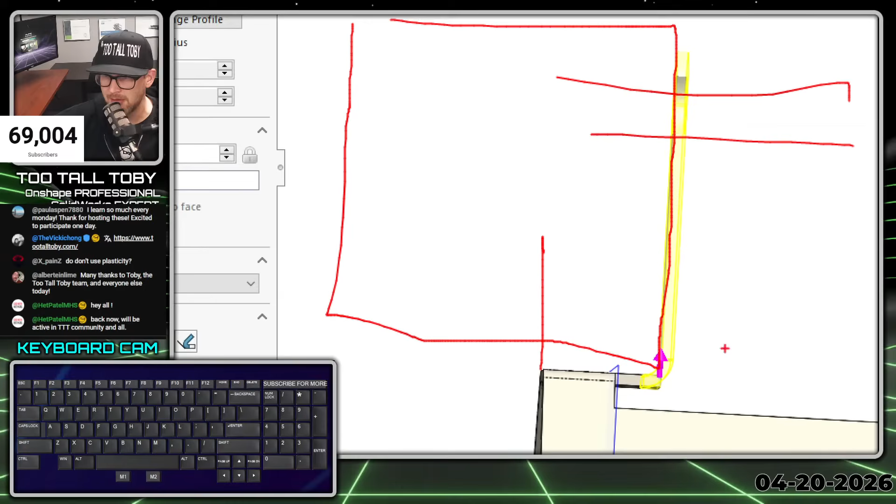They need to have enough room that this thing can slot into place on the next part that it fits into. It fits into a part like this, and there's a hole in that part that this needs to fit into. It needs to have enough room to slot into that part. And that's why the customer gives you these dimensions this way.

So if I move that thing over, now this face is this distance, 41. The status bar is telling me down here 41. That's what we like to see.

And so now let's see if we can get this one correct. So we rebuild, and 673.11, 673.11, and enter, and yes, let's go. That's what I'm talking about. We did it, we did it.

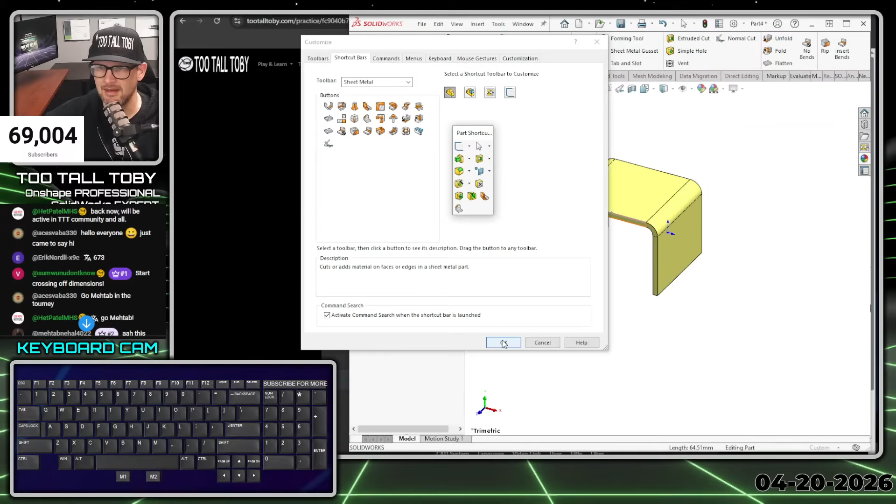I don't think there's much more I need for this model. But if these are the types of models I'm working on at the office, it's going to be good to have those commands added in.

So now I could say, all right, let me try this thing again—I bet I could do it a little faster. We're going to go into our TooTallToby practice models library, say try again, and reveal drawing.

Our game plan is to create a sketch that comes up, over, and down, offset that sketch geometry, add in dimensions, extrude it, and add the cut going through here. Then we'll have room for our flange. Since this flange is kind of offset at 41, maybe we'll start by making a tab up top.

Oh, that would have been base flange tab—that's probably why I had it there in that menu. So we'll add a tab up top, then add a flange coming off of this, and then all we should have to do is add in those cuts, the holes, and the fillets, and we're good to go. That's our game plan.

So let's open this in a new window, move it over to our screen, and see if we can go through this a little faster, maybe even beat the average time of 10 minutes and 45 seconds. Let's see how we do here. Let's move this up.

All right, you guys can sort of see it. So here we go. We go new, and this is going to be a part in millimeters, and we're going to go here to front plane, begin to sketch, orient our view, S key.

Maybe here what I'll do is I'll just start out by creating a construction line for the floor, and then I'll create a line that comes up here like so, a line that comes over, and then a line that comes down at approximately 45. SolidWorks will often give you that 45 degrees.

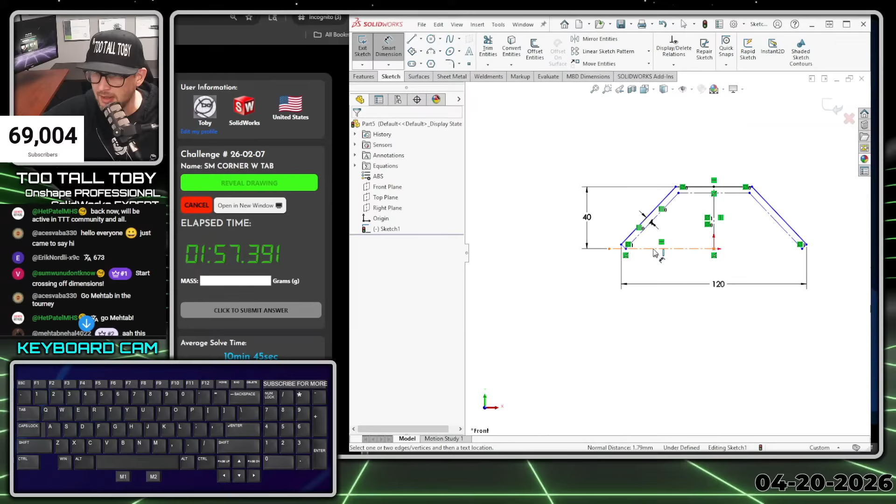Now we can take that geometry and S key and jump right into sheet metal. This is going to have a wall thickness of 4. Make sure it's going the correct direction. It's going to have a bend radius of 6.

And this is going to go out to a depth here of 200 millimeters, and I'm going to reverse direction of that just to match up one-to-one with the previous example. Now we're going to click on the front plane, hold control, left click and drag, let go of control, let go of the mouse. That's going to go out to a depth of 25.

Now we can pick on that sketch plane, begin a new sketch. We can S key here, create a construction line. We can create a couple of solid lines here. And this solid line is going to come over and then kind of come down into a triangular shape.

And we'll take that geometry and mirror it. It's good to have that mirror on that sketch shortcut. We'll take these two and make them perpendicular. We'll add a dimension that goes from here to here.

And that dimension is going to be at 35. And then we could add a do-nothing dimension here because we want this thing to be able to withstand a rebuild. So we'll make that something like 30. And then we'll say that's going to be not marked for the drawing, and it's going to have parentheses on it.

And now we're going to take that geometry and extrude cut, and we're going to right click and say offset from surface. And the surface will be this surface down here. And then the offset distance will be 25.

Okay, and now we're ready to create that base flange tab feature. So we'll begin a new sketch here on this face, and we will create just a rectangle that goes from here to here. And then we'll say that we want that rectangle to have a height here of 41, that dimension from the drawing, and that's going to use the base flange tab command.

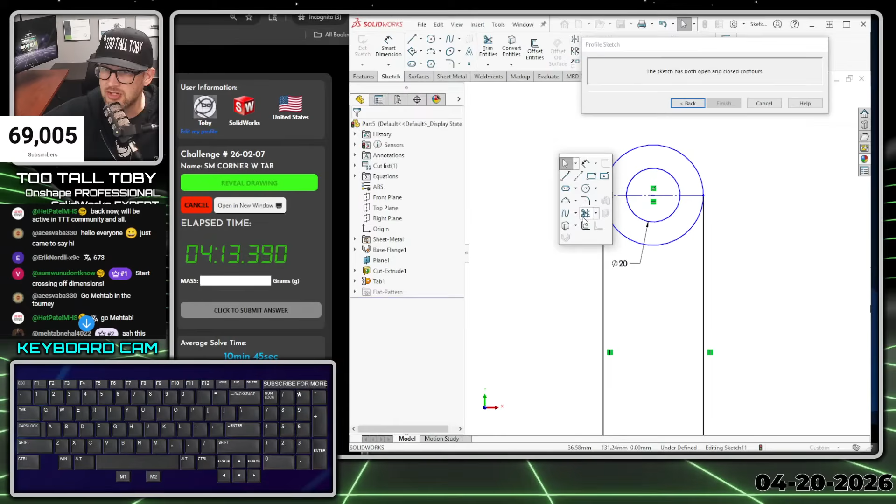And then here, what we could do is S key trim, and just trim out this excess here. We could even say keep trimmed entities as for construction. That way we don't run the risk of running into an issue with that circle. It's kind of an advanced move you could do there with that circle geometry, so you don't actually trim it off and lose tangency on the other side.

So then this is going to go up to 135. Okay, and that looks pretty good for the preview. Finish. Just do a quick sanity check here. From this face to this face is 41. That's what we wanted, so that's good.

This face here, begin a sketch, orient our view, S key, construction line from here up to 20, over to 15, over to 145, S key, circle.

This one here has the diameter of 13. This one here has the diameter of anything. Pick this circle and this circle and make them equal. S key, extrude cut, right mouse button through all, right mouse button again to finish that feature. Take that feature, hold control, pick a plane, and you've got your mirror set up to automatically mirror that across.

And now all that's left to do is S key, break corners. We're going to make this one a fillet with a radius of 8, and we'll get this guy, this guy, this guy, and this guy. And then we're going to repeat that last command.

You can just press enter to repeat the last command. This one's going to have a radius of 15, and it's going to be this guy, this guy, this guy, and this guy. After we do all that, we can right click and say assign material, plain carbon steel.

Do a control Q, look at our sensor, and our sensor is showing 673.11. So let's take a look at the app here and see if we got it right. 673.11. Yes, that's what I'm talking about.

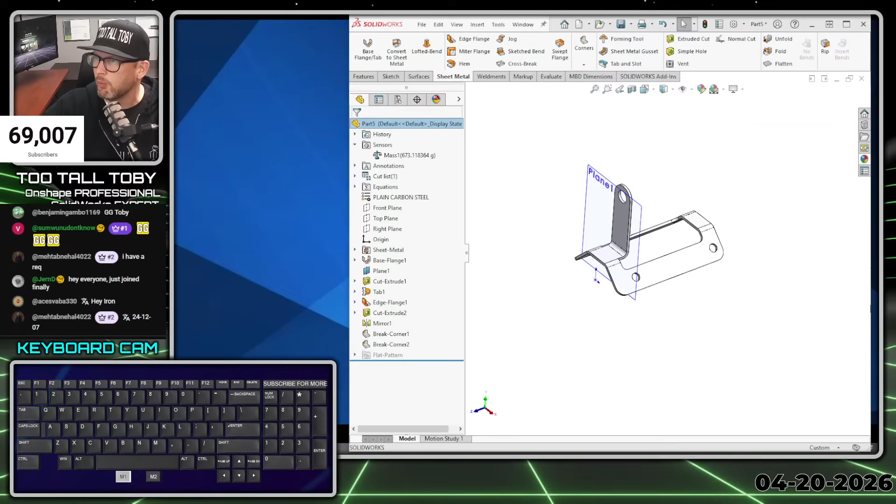All right, take a sip of my delicious coffee. All right, let's give this thing a try here in Onshape.

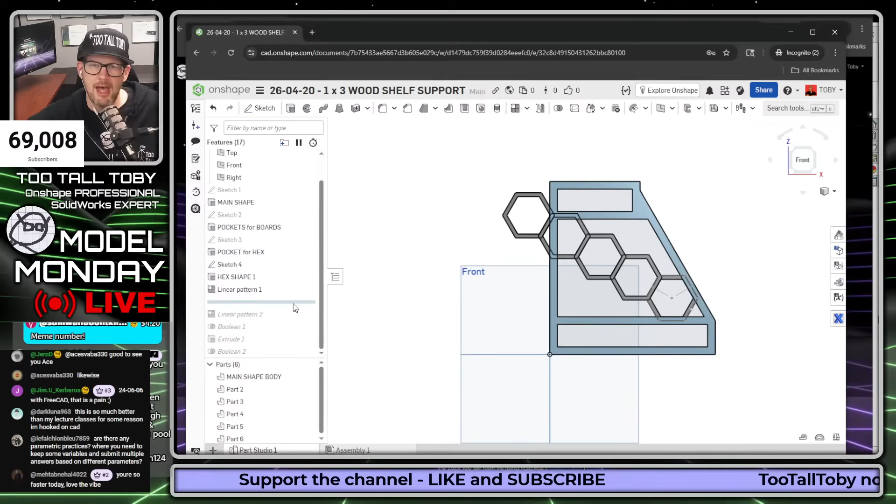So in this case, if I know the model might get a little bit wider, if I know I might want to create a version where this thing can facilitate 2 boards up top and 3 boards down below—currently it supports 1 plank up top and 2 planks down below—then I want to make sure when I create this hex pattern that I kind of overfill it, and overfill it in a way that when I go to make those changes, it's going to hold up.

Before I go into the meeting with the customer, I want to have this ready to go. So if the customer says, oh that looks really good, we also want to sell one that can handle more boards, a little bit wider—well, I know I only need to change this one dimension. I just take this dimension and add 2.5 to it, make that one 8 wide, hit the green check mark, and everything else updates. That whole hex pattern updates.

But the thing is, the only way you're going to know that is if you know what types of questions a customer is likely going to ask. And that's going to be different from one customer to the next, or if you're designing your own parts, that's going to be different for you.

So yes is the answer. Are there any parametric practices where you have to change the dimension? Yes. You should do that with all your models, every single model. You should always be thinking, what is the customer going to change? What's most likely for the customer to change? And you should do a little bit of testing on your models to make sure that's the case.

Because it will happen, and it makes you look really good when you're working with a customer or your bosses. It makes you look really good if they say, well what if I made that wider? And you're like, no problem, I anticipated you asking this question. So you should definitely be doing that on all your models.

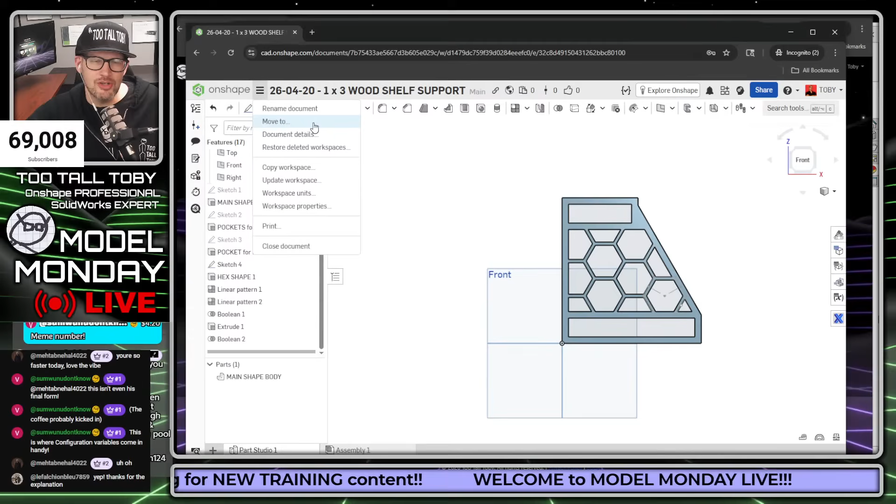Victor K says, this isn't even his final form. The coffee hasn't kicked in yet. Yeah, it's true, it's true. But we are going a little bit faster today. I'm glad you guys are liking the vibe. All right, let's keep going with the vibe here.

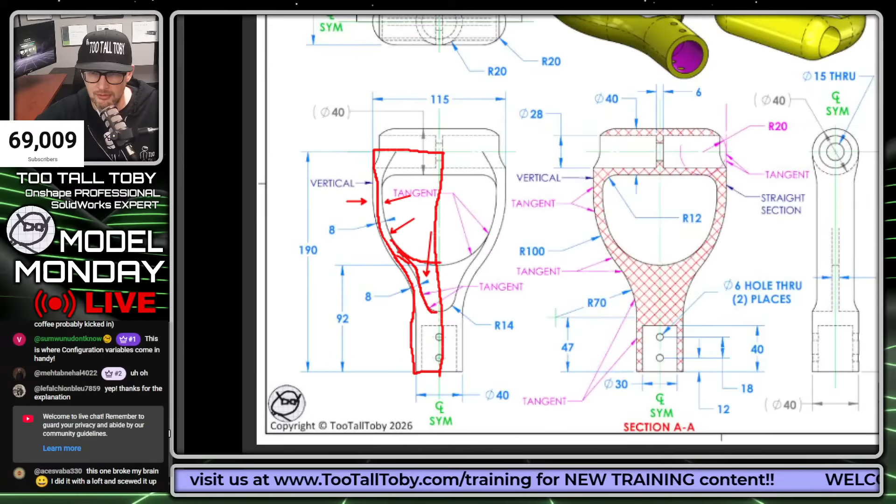So I really like the idea of keeping your sketches simple. And I think that even when you have a complicated part like this, if you just keep your sketches simple, you can really end up simplifying the overall process. The other thing that I would look at when it comes to a sketch like this is the idea that you've got a spherical corner coming together with a non-spherical part, like a cylindrical part.

It's kind of like a curved part here, but it's kind of like a non-cylindrical part. You have this cylinder that's running into a sphere, and then you have these sidelines coming down. Whenever you have something like that, a lot of times you can make your life easier by learning how to work with multi-body and using multi-body to facilitate that blend.

There's a lot of different scenarios where this comes up, and it's something we talk about a lot in the multi-body design class, but I really like this tutorial because it gives me a chance to show off how to use that kind of multi-body approach with the idea that at the end, you're going to merge everything together. So that's the approach we'll use for this one.

And I know we took 2 minutes to come up with a game plan for this one, but I think it's always important to come up with a game plan before you jump into your 3D CAD.

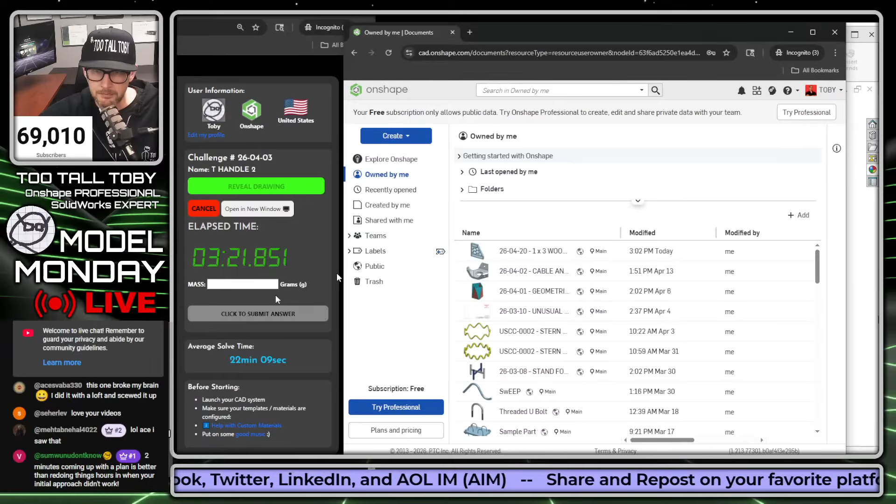Here we go. Let's bring up the keyboard cam and let's create a new model. I am going to create this in the public space. So if you're using a free version of Onshape or the paid version of Onshape, you can look this up in the public space by searching for T-handle or T-handle 2, or searching for this entire string. You can just go into Onshape, free or paid version, search the public space for this, and then you can see the entire model and look through the entire model history.

Now that we're in Onshape here, let's start with our units, workspace units, millimeters, grams, good. Always good to double check that. You don't want to make the whole thing in inches and then realize at the end that it was supposed to be in millimeters. Let's create a construction line here since we know we're going to mirror this.

So begin a line here, then Q to turn that into construction. Hit escape, S key for line, single click here. This is going to come over to a distance of 20, which is half of 40. This is going to come straight up here to a height of 47, which is the distance to the beginning of this arc. We're going to take our mouse and not click anything, but just come back over this endpoint.

And then come off of that endpoint with an arc, and that's going to have a radius of 70. We're going to come away from that arc, come back and touch that endpoint again, then come off of that endpoint - that takes us into a tangent arc. This one's going to have a radius of 100.

And then for this final line here, you probably have to choose to either make it tangent or make it vertical. I usually choose to make it vertical. So vertical line there, come over here to this point, center line, and then come down here to this final point down here. Okay, now we can hit escape. Now we can pick this arc and this line, and then we can press T, which is the shortcut for tangent. T is in Tango, or T is in Toby.

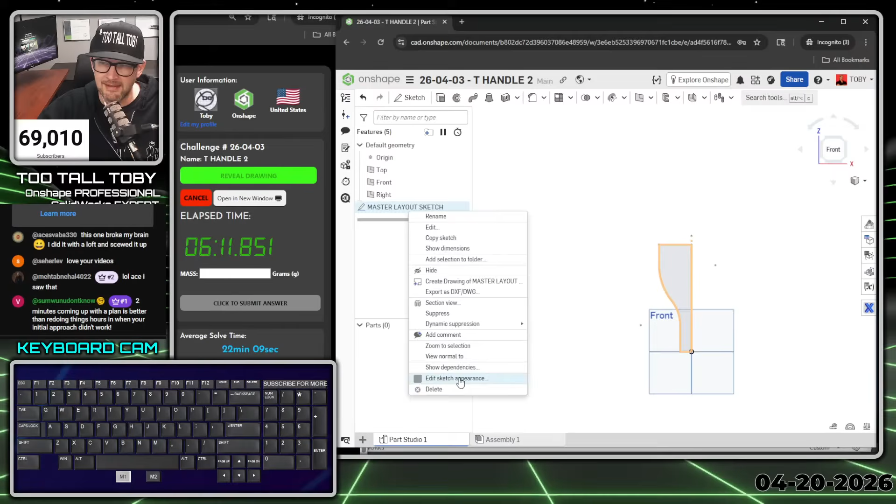So now that we've got this geometry, we're going to exit that sketch. Could almost rename this sketch here, so Shift N, this could be like the master layout sketch. It's definitely something you could consider doing, as like a master layout sketch, just so you can keep referencing it. You can also right click on that sketch and go to edit sketch appearance and make that a red color, something that'll really pop out, so it's easy for you to reference.

So now that we've got that shape, I'm actually going to immediately jump up here to the circular or cylindrical handle. I'm going to sketch a circle and extrude it. I'm just doing this to give us a reference to this idea of working in multiple bodies.

So I'm going to go to the right plane, begin a new sketch, S key, circle, single click this point from our master layout, move over, single click again, let go of our mouse, and that's going to have a diameter of 40. Then I'm going to do S key extrude, and that extrusion is going to go up to a vertex, and the vertex is going to be this vertex here. So we hit the green check mark, and that's our cylinder handle shape.

That's like our cylinder handle shape there. We're going to kind of leave that up in space, and we're going to show the master layout sketch again.

Now we're going to go to the front plane. At this point, we could either use the master layout sketch or make an explicit sketch. I kind of tend to ebb and flow, you could go either way. The Onshape guys always get mad at me because they don't want me to create this extra feature that's really not necessary. And it's true, it's not necessary. The only reason you would do this would be if you were maybe anticipating changing the master layout sketch later. Then you might consider making a new sketch here on the front plane.

So, new sketch, and then maybe converting these entities manually. What I mean is we could take all these entities, just the outer entities here, and then do a manual use or project convert type of command. So that's this command here, use project convert. So one by one, I picked all these, and what that's doing is insulating me against the potential of me going in later and adding a line here on the master layout, or adding a line across here, and having that somehow mess up my outer perimeter shape.

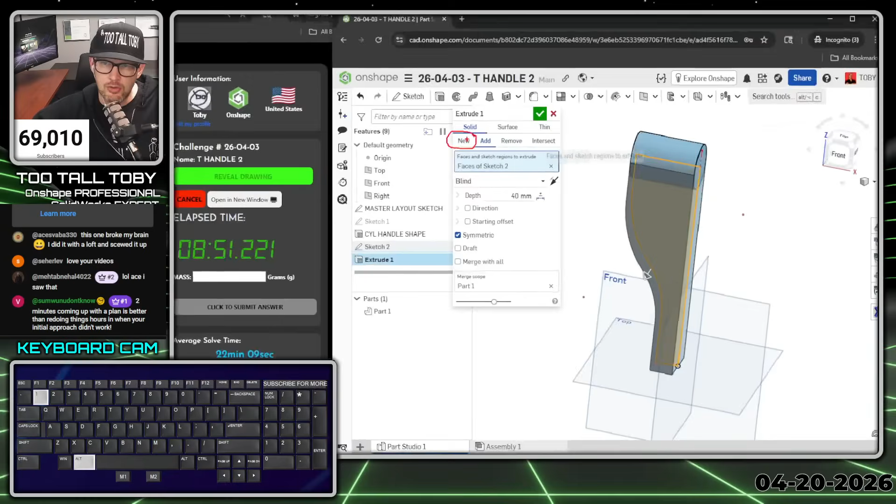But what I'm going to take care to do is make that its own new body or its own new part. So I'm going to click new here, and that gives me these two parts down here in this parts list. The reason that's important is because it makes it really easy for me to merge these together later on and get that nice smooth blend between the two bodies.

So I'm going to choose to make that as a new part, and now I've got one part up here, which is the handle, the cylindrical handle, and then I've got a different part down here, which is the actual main body of the handle. So why does that matter?

Well, what I'm going to do next is add a fillet. So I'm going to go into the fillet command and add a fillet here to the handle, the main handle shape. That fillet is going to have a radius of 20, which leaves me with a nice cylinder down here at the bottom, filleting off this bottom edge. This thing is extruded to 40, and so I've got this 20 millimeter fillet.

That's pretty nice. But then as we come up through the side of the handle here, those fillets kind of continue up the side of the handle.

Once we have that shape, the next thing we're going to do is kind of scallop that shape out. We're going to create a cut that goes down here, and we're going to use that shape to cut this thing away, to cut this thing out.

So in order to create that shape, we'll go to the front plane, press S, begin a new sketch, and get normal to it. Then let's take this line from the master layout sketch - this line and this line and this line. Let's take these lines and do a command called offset.

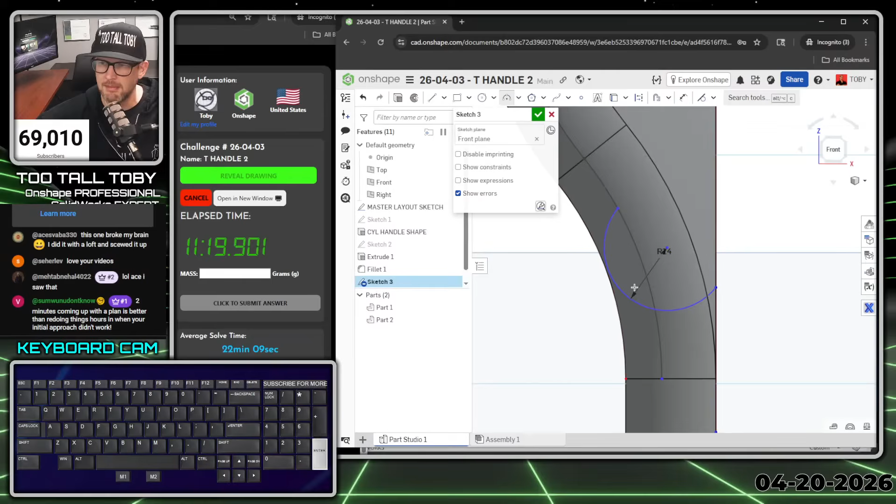And then what are the conditions for this arc? Well, the center point of this arc should be directly above this point here, so we'll take those two and make them vertical. And then this arc here should be tangent to this arc here, so we'll pick those two and press T, which makes those two tangent.

And so now we've got this nice closed shape here. Whoops, this shouldn't be blue, so grab a blue point and move it around. Whoop, okay, that line's supposed to be horizontal - pick that line, press H for horizontal, there we go. So now we've got this nice enclosed shape here.

We can go to extrude, and this is going to be a remove, and it's going to be remove through all. We'll make this symmetric, remove through all, symmetric. And let's say we chose this option here, merge with all - well, that's not really what we want.

We don't want that extrude to cut through this part here. We don't want it to cut through the cylinder part, because remember, on the handle of this shovel, that cylinder part should be a full cylinder. So that's why it's nice to have these non-merged - here in the definition of this part, we could say we only want it to affect certain bodies.

Instead of saying merge with all, we could say we only want it to affect this body down here. So now what we're doing is we're cutting away that gray body, but we're leaving that blue body behind, and that is what we want.

And why is that so important? Why is that what we want from the handle? Because if we add a fillet here on the handle, look at how smooth that's going to blend in. That's going to give us exactly what we want.

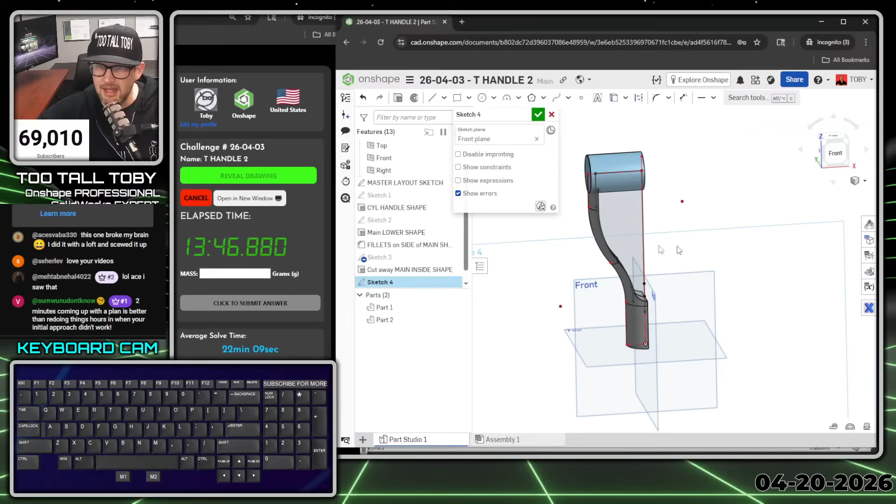All right, so now we can go front plane, begin a sketch. For this one, I would probably take the sketch I used in the previous sketch, the one I used for that main cutaway, just pick the whole sketch here out of the tree, and then pick this button here, use project convert. So what that did was, let me hide the master layout, it took all that geometry from this sketch here. It's called sketch 3. It took all the geometry from that sketch 3 and it just traced it right into my current sketch, sketch 4.

So by using that command, use project convert, I'm able to basically trace that previous sketch. And the reason that's nice is because now, N for normal, I'm going to create this arc here, which is tangent, and then I'll have everything I need to fill that in with that kind of ribbed area down at the bottom. So it just makes it nice to be able to reuse that sketch in that way. I mean, sure, I could reference the edges of the part too, but sometimes I think sketches are a little bit more robust than edges of the part.

They're a little less likely to get filleted, for example, or chamfered or cut away. So sometimes I actually prefer to reference the sketches like we've done here. So I just make an arc there. I don't know what the radius is, so I'll just hit escape. I'll take this point of the arc and this point here and make that vertical like we did before. I'll take this arc and this arc here and make them tangent, as it's called out in the drawing. And then what did I end up with here? I ended up with an inadvertent horizontal. That shouldn't be black, it should be vertical, not horizontal there.

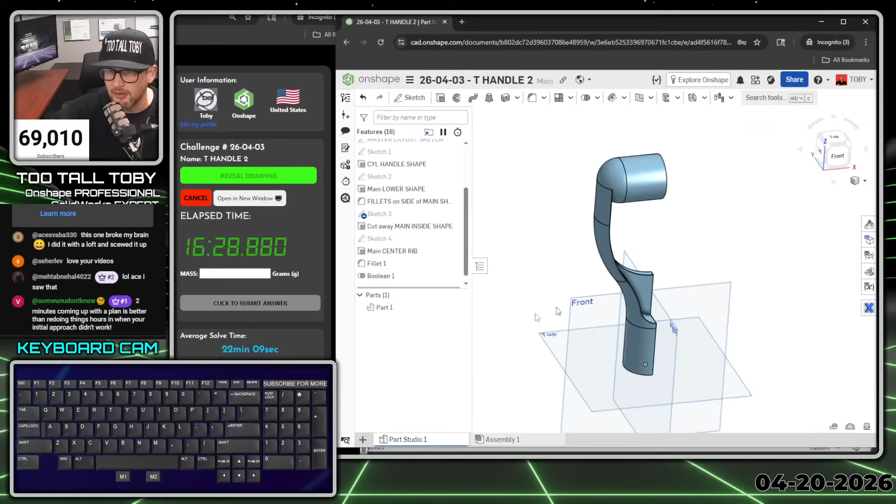Take those two parts, do a Boolean combine, a union, and merge those two parts together. So now they're all just one single part, one single body. Now why is that important?

Because now we're going to try to add in the fillet along this edge. We go to the fillet command and fillet along this edge. What's the radius going to be? It's going to be 12 millimeters, and that brings you right up to this location. You end up with this smooth tangency going across as you add in that fillet all the way around, fillet that off at 12 millimeters. We hit the green check mark and boom, there's the fillet between those two.

So now for this upper region of the handle, I'll call this one fillet upper corner, and this one fillet blend handle, I'll call this one blend lower to handle. I know the whole thing is a handle, but I kind of think of this as the lower region.

So then what we do is we add in our cuts before we mirror everything. For the cuts up top here, we see a distance dimension here of 6 total from the customer. A lot of times if I have a cut like this that's 6 total, it's really saying that this wall is 6, but sometimes you can get away with making a cut that represents the wall thickness as well. What I mean by that is I could pick this face, begin a sketch, hit S key, begin a circle, and put the circle right at the center of this arc.

Then give that circle a diameter of whatever the smaller hole is, 15. Enter. Now I can take that circle and do an extrude cut. So extrude, remove, symmetric, so it goes off halfway in this direction and halfway in this direction, and I can make that symmetric depth 6.

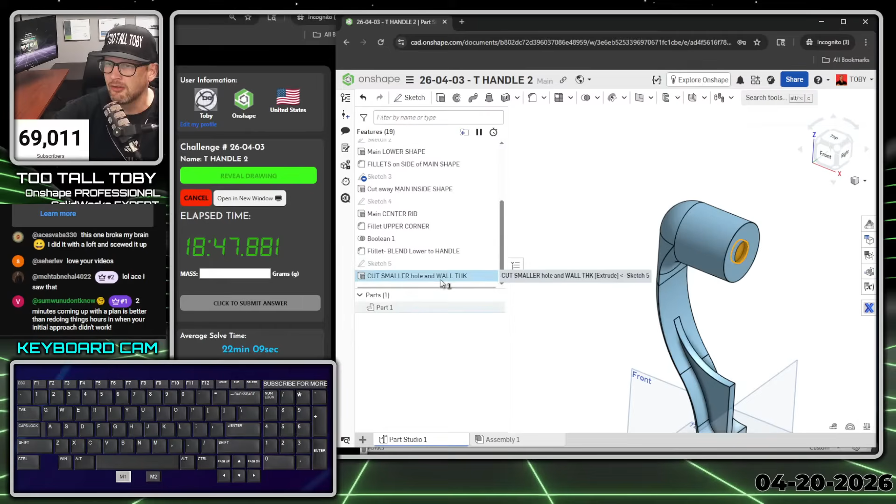Enter, enter. The nice thing about that is when the customer is looking at this and asks, well what's the depth, what's the wall thickness of that rib? Once I have the whole thing mirrored, I could go here and call this one Shift N, I'll call this cut, smaller hole, and wall thickness, something like that, so I'd know what that is. Then when I'm talking to the customer I could say, oh it's 6 millimeters, and they could say, oh could you change that to 8 millimeters? Well if I wanted to change the wall thickness in that area, I would just change the depth of that hole.

Because the next hole I'm going to create is here, on this face, S key, begin a sketch, and create a center point circle right at the center of this location. That center point circle is going to have a diameter of 28, and then that one is going to go through everything, so extrude, remove, through all.

Now we've got that wall thickness, from this wall to this wall, based on this cut extrude we created, the cut smaller hole and wall thickness. It's just a different way of thinking about it, but it's good to think about these things in a lot of different ways.

Serial Sal is saying that command is almost like copy and paste in the current sketch. I'll do a review of that command at the end, Serial Sal. Not exactly, it's more like a trace or projection, not exactly like copy and paste. In this case it is because they're coplanar, but it's not always like that. Good question, I'll review that use project at the end of the tutorial.

So this one would be a larger hole in handle. There we go. And now that we've got that larger hole in handle, we're ready to make the final couple of features down here at the bottom.

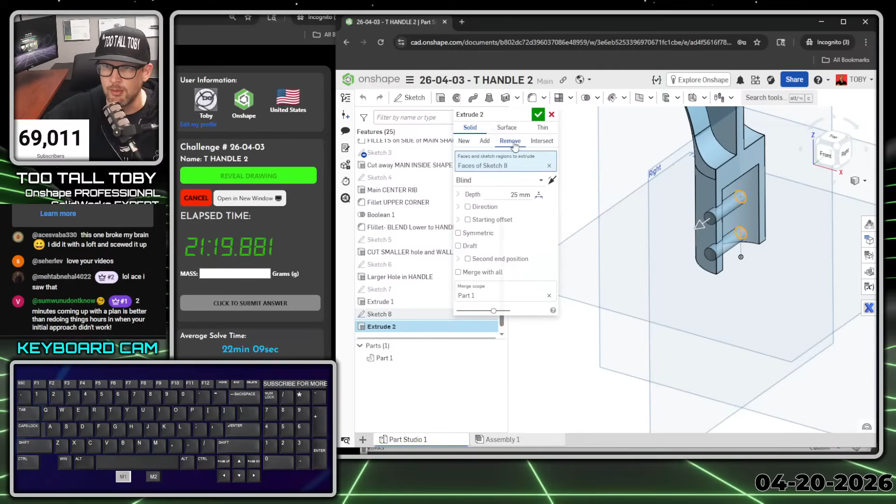And then Shift E extrude, and you see it realizes that those are the most logical closed regions. So we would do remove, through all, symmetric, and that punches those holes through.

Okay, so then this would be Shift N, larger hole at bottom for shaft, and then this would be smaller screw holes at bottom.

And finally, we're going to mirror this thing. So we pick this face here, go into our patterns, choose mirror, and we're going to mirror this, pick the plane, mirror this. Okay, and merge that together.

And then we're going to right click here and say assign material. This material is going to come from the TooTallToby custom materials library, and it's going to be the TooTallToby ABS.

Hit the check mark, come down here, pick this button, and that is going to allow us to measure the mass of this part. And we're coming up with 166.3.

So if we move the app back in here, 166.3 and enter, and oh yeah, we did it. Let's go, let's go. 22 minutes and 15 seconds.

So we were slightly slower than the average time, but we did get it, and we did get it correct on the first try, and that is what is important.

Okay, it's good to be fast. It's really good to be fast, but you're never going to be slower, or almost certainly never going to be slower than it takes for you to send the parts out and find out that they are wrong.

So if you need to take a few extra minutes or even a few extra hours to make sure you got it correct, it's still going to be better than sending out the drawings and having them be wrong and then getting the wrong parts made.

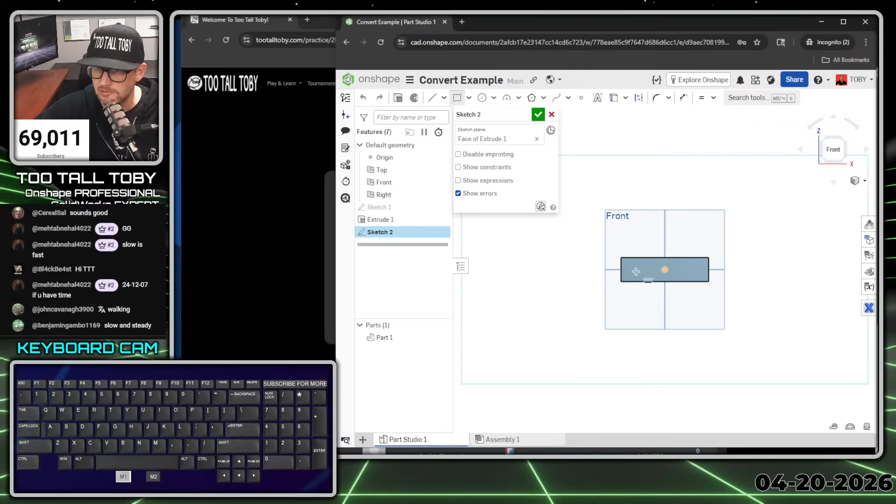So we'll go 80 by 125. It's good. And then it's vertical. And then we'll include a hole in that sketch, a 20 millimeter diameter hole here. Okay, and then we will extrude, and then let's say we reverse direction on that, like so.

So now down here at this end, we want to line up with that hole. So we could begin a sketch here, and then create some geometry that we want to align to that hole. So we could do like a tombstone shape here, like so.

And then what we could do is take this arc here and use that project convert. Now you can do it with an individual arc, or with an entire sketch. In this case, I'm just going to take that individual arc and do a project convert. So you see what that did was it took that and projected it forward. But if I just did a copy and paste, there wouldn't be a dynamic link between the two.

So what I mean by that is if I take this point here and hook it to the center of that arc, and then take this dimension from that original arc to this arc out here, and say I need there to be 5 millimeters worth of meat there, now I could do feature extrude, and reverse direction on this one as well, and make that one a little bit thinner.

And then I could go back to the earlier sketch here, and change it. So this could maybe go from 20 to 25. Well, that's going to push downstream, and this is going to update, and this is going to be 25 now as well. So that diameter is 25 as well, so it projected forward.

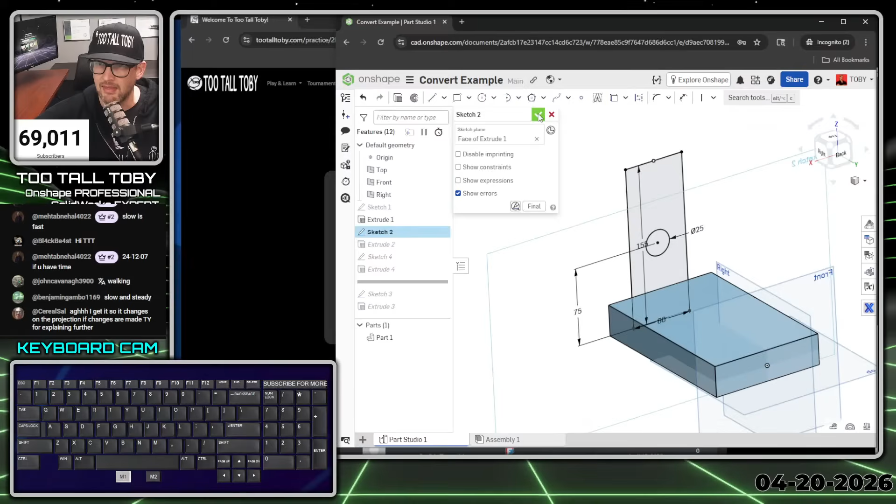And then again, if I go back to the original and change the original here, this is going to now become 155, and this is going to become a little bit more narrow. It becomes 60, and then I hit the green check mark. Now the projected version also updates. So that's the main difference.

You could also take this sketch here and right click on it and say copy sketch. There's a copy sketch option in this menu, and then come over to a different sketch plane and right click and do paste sketch. That certainly works, but there's no relationship between those two. If I go into this sketch, it didn't even bring in the dimensions from this one. So there's no relationship, whereas with project convert, there is a relationship. Sometimes you'll even do it when they are coplanar, like in the example of the master model.

All right, so we got a request here from Mehtab. He says, how about 24-12-07? Let's go.

So we'll go in here to the practice models library, take a look at the 2024 library, and then we can sort this by the newest first. So, 2024-12-07. Let's see what we're getting ourselves into here.

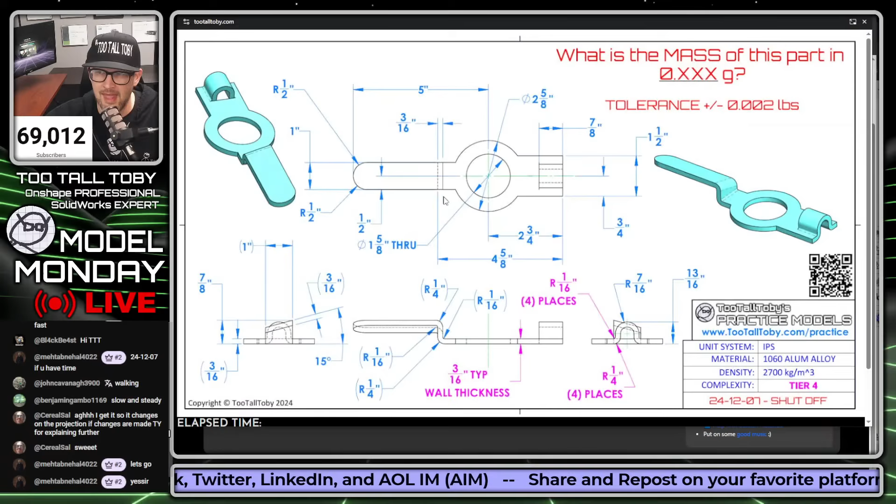This is another part where I'd definitely be tempted to create this using a layout sketch, looking down from the top. The reason is because we have so much information coming just from this location - it's clearly all being defined on the top. So I think I'll probably create this using a layout sketch looking down from the top, similar to the last example, and then work my way out from that layout sketch.

I think what's going to be tricky about this part is creating this geometry over here. It's interesting - the walls on this geometry look like they're straight, and in the real world they wouldn't be. You'd kind of be bending this part, but maybe this is a plastic part built for a children's toy set used to teach kids about plumbing. Maybe it's something like that - a plastic part so we can get away with those straight walls.

But in the real world, this would almost certainly be some type of sheet metal part. You'd stamp it out, and that means these walls would be perpendicular to the wall thickness. But we're going to try and make it match the drawing exactly here. It looks like this part is in inches using fractions, and we're going all the way down to 16ths for fractions here. So we get some practice using fractions in Onshape as well.

So 2.5 minutes there to come up with a game plan, I know, but I think it's always good to come up with a game plan before you jump into your 3D CAD. Let's give this thing a try and see if we can't get this modeled up in 3D CAD with the correct mass. So here we go.

We're going to create a new document here. I'll call this one 24-12-07 space shut off, so if you want to look this up in the public space, you can. So you create a new document here, bring up our keyboard cam, and we're going to try and beat the average solve time here of 17 minutes and 5 seconds.

We're going to start by going into the hamburger menu up at the top here, and from the hamburger menu we're going to say workspace units and change this to inches and change this to pounds so we can answer it in the correct units here. And then top plane, S key, begin to sketch, N key to get normal to.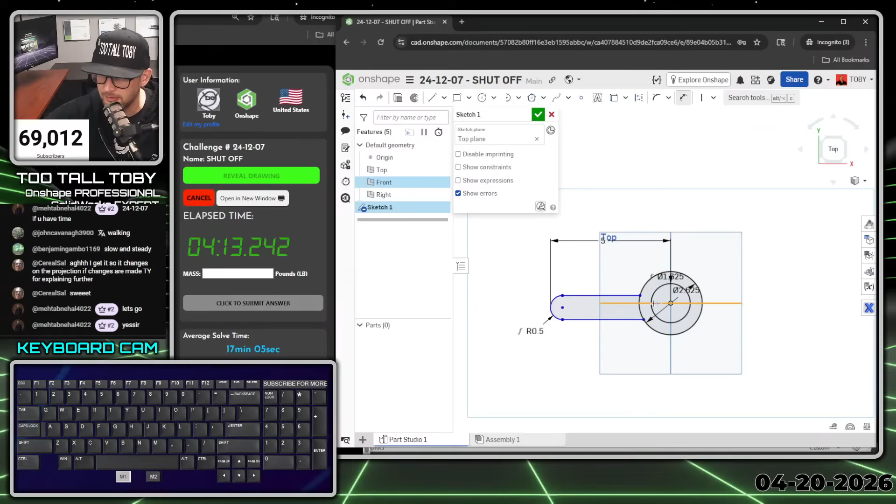That distance from the center point, or from this plane to this edge of the part, is also 1/2 inch. So I'm going to define all that here looking down from the top. And then on the back end of this thing, I'm going to take the same strategy.

So I'm going to create some geometry that comes over, down, and back over here. This is how I approach my sketching. You don't have to sketch every single thing at once. A lot of times I'll just make one or two arcs, define them, get them fully locked down, and then go on and make the rest of the geometry. That's a great way to not get your sketch all out of proportion, and also not end up with the sketch becoming tangled in on itself.

So it looks like this distance from here to here is 2 3/4. If you can't do that math, you can do 2 plus 3/4, and then let Onshape do the math for you. And then the distance from here to here is also 3/4. Nice, fully defined sketch there.

Now, as far as that bend region goes, I think I'll probably tackle that as a separate sketch. I'll probably get into this region here, looking in from the end, and try to figure out what needs to be cut away to get that shape the way I need it. So I'll come back to that as a separate sketch. I think I've got enough in there for the first sketch.

So we'll take that geometry and start extruding some areas of it. I guess the other thing that's kind of important to me here is the distance where this bend begins. This bend right here, that distance where that bend begins is going to be important.

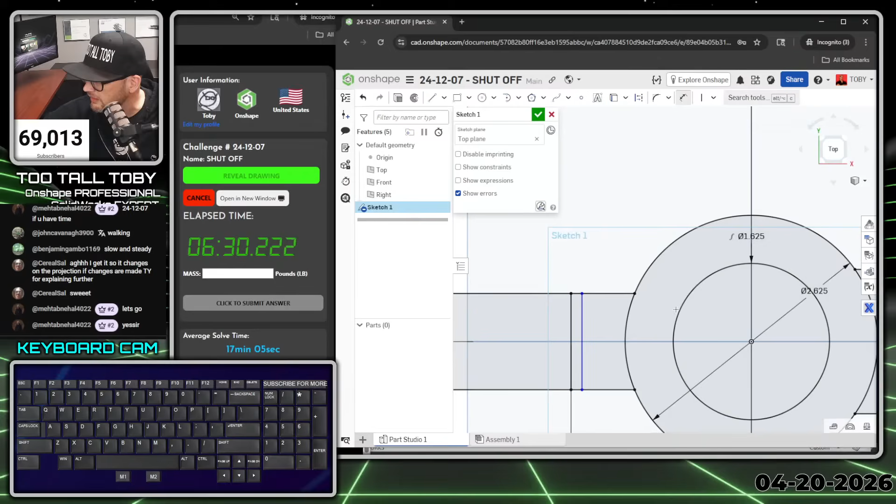So the dimension is, let's see, there's a dimension to the flange location, which is 4 plus 5/8. And then there's a dimension back in this direction to where the flat geometry ends, and that distance is 3/16. So I'll just include that here, 3/16 to that area there.

And so now I can take that geometry and do an extrude, and I don't need to extrude the entire sketch. I could just extrude this region, and this region, and that geometry is going to get extruded up to 3/16. So let Onshape do the math for me there.

So I would consider that kind of like the first main flat shape, and I'd probably call it something like that, main flat shape. And when it comes to creating your models, this is the habit you want to get into. You want to discretize your models into different features, into different areas of the model. So that's one area of the model.

Another area of the model is going to be the cutout for the formed shape. Another area is going to be the formed shape itself. And then another area is going to be this shape up here, where it comes up and bends down at an angle. And then you've got that angled tab sticking out there for that shutoff. So each one of those is a different area of the model.

We're done with the first area. Let's see if we can now get on to that second area. So it looks like in that second area... I'm just trying to see if there's anything in here that's going to help me understand what this is without drawing it. I feel like I almost have to draw this up.

So we've got this radius here of 1/16 on the inside, up and over and down, and then a radius here of 1/16 on the outside, and then a radius of 1/4 on the inside, up and over, and then back down that radius of 1/4 on the outside. So if we take that 1/16 plus 3/16, which is the wall thickness, that gives us 4/16, which is 1/4 inch.

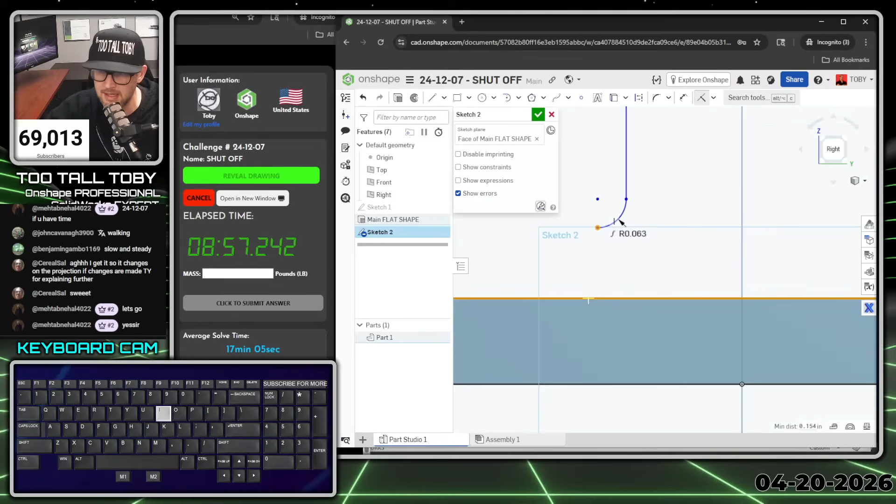Come back, touch this endpoint here. That's going to be my 1/16 radius. Okay, and then we'll take this point and make those vertical. That way, when I take this point and make it coincident here, it will also be tangent. So if this point is vertical to this point, then that arc is going to have a tangent transition into this edge here if I make it coincident. So I made those vertical, V, make those vertical.

And now I can continue that sketch. I'll create another line here, come off of this endpoint here, come back to the endpoint, touch the endpoint, come up and over. So that outside radius is going to be 7/16. And then come down here, come away, touch the endpoint, and then come off of that. That's going to have a radius of 1/16.

Hit escape. Take this point and this point, make those vertical, V. Take this point and this edge here, make those coincident, I. And that way I've got that nice smooth transition into that surface. And it looks like the center of that arc is also centered with the rest of the model here. So the center of that arc is this center line here, which is centered with the rest of the model. So I can just line that right up with the origin.

This is why it's good to really think about your origin before you get started. So we can make these guys here vertical, V for vertical. And then it looks like the max height to that arc up top there, the distance from here to here, the max height of that, is 13/16. Okay, 13/16 to that max height there.

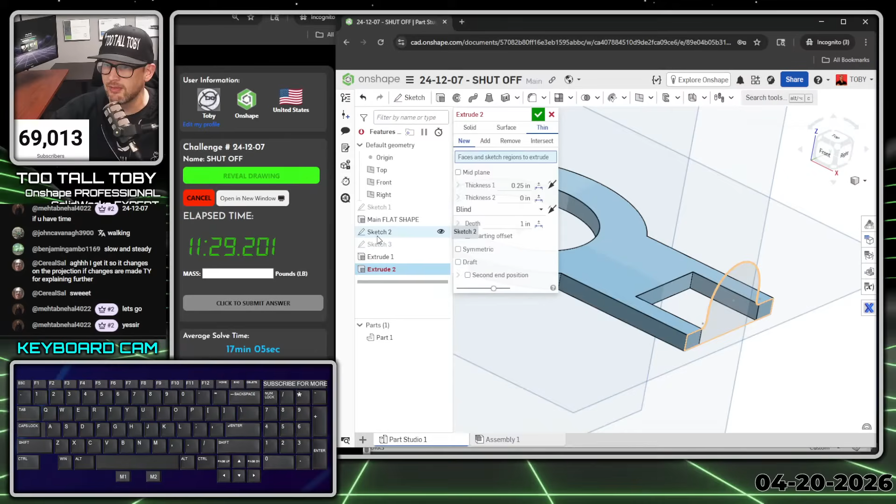And now we can go back to that earlier sketch, this sketch here, and we can do extrude. And this is going to be a thin feature extrude. See, I could offset that geometry, but I could also just do thin feature extrude here with that sketch. So that thin feature is going to have a thickness of 3/16, and it's going to go to the other side.

And then where is that going to go? It's going to go up to vertex. So for the depth of this, it's going to go up to vertex, and that's going to go up to this vertex here. We're going to do an add so that it merges in, and there we go. Now we got that kind of formed shape on the end of that part, on the edge of that part.

So this would be Shift N, cut away for formed arc shape. And then this one here would be formed arc shape.

All right, making some pretty good time here. So we're down to the final area, the final discretized area of this model. So now that we've got this final area, how are we going to solve this final area here? Well, this one is definitely interesting.

Maybe, see, this distance here, this 4 5/8, is too... Let's see here. It's to the tangency that we're seeing.

Man, this is a rough drawing. What is that too? Oh, I see, it's 4 5/8 to this wall.

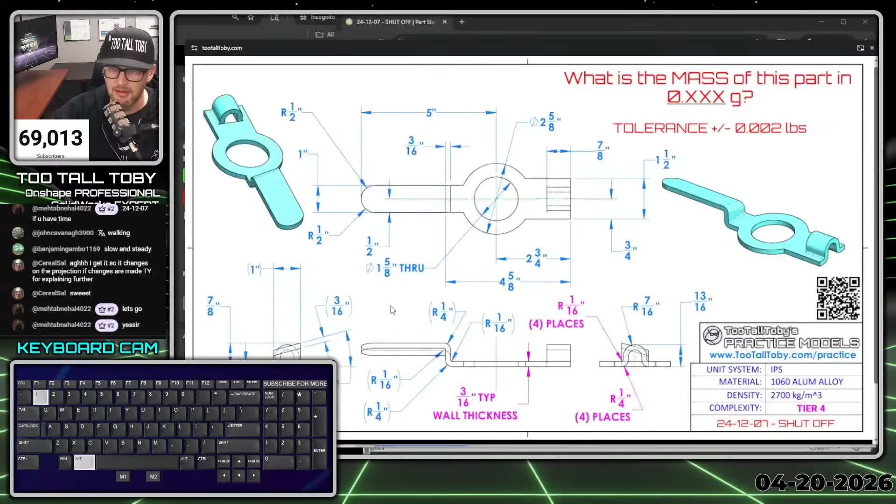So we go to this surface here and begin a sketch, and then we're going to create a sketch here that starts on this line, comes over here to this corner, comes up, and this is going to come up to that height of 7/8.

Then it's going to come down at that 15 degrees, and then it's going to close back off here, back down to the bottom. So if we create a dimension on here from this line to this line, and then we make that dimension 15, that gives us a nice fully defined sketch.

Now we can do S key extrude, and then that's going to extrude to our depth here. This will be a solid extrusion, so you pick solid here and then pick the sketch again. That's going to be a solid extrusion, and that's going to go out to a depth here of 3/16.

Now we should be able to create the final geometry, which is going to come out to that total depth of 5 inches. Now, something kind of cool that you could do here is you could go back to this main sketch.

We've got this distance dimension that we created here. We kind of laid things out here. Whoops, make that from the top. We kind of laid things out here from the top with this distance sketch.

But what we could do is we could create a line here, either a solid line or a construction line, and then we could take this line here. I picked up on a horizontal there by accident. We could take this line here, let's make this line vertical, and then let's make this line construction.

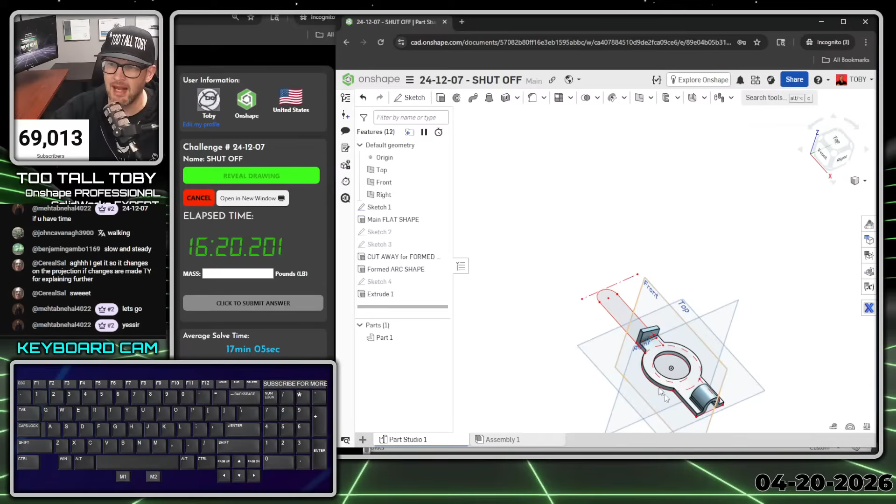So for example, if I showed that layout sketch and then I did a right click and said edit sketch appearance and made that like a red color to make it stand out, well, now I know that there's a point here that I can reference, or a point here that I can reference. And when am I going to reference that? I'm going to reference that, and this is one of the things I love about Onshape. I'm going to reference that when I grab just this edge here, and I'm going to do an extrude.

And let's go here to thin, and let's pick that edge again. Oh, can I not pick that edge? Oh, I can't just pick that edge, huh, for my, oh okay, I do need to have a sketch line. Ah, rats. Thought I would be able just to pick that edge there. All right, no problem, let's do it.

Let's make a sketch here. Or actually, you know what, wait a second, you know what we can do? We could just show this sketch. Here we go, we can just show this sketch, right? And then we could do extrude thin, and then we could pick this line here from that sketch. Oh yeah, that's what we like. Let's go Onshape, that's what we like.

And so that extrude there is going to be to a depth of, or to a thickness, excuse me, of 3/16, so 3/16 for that depth, and then we'll reverse the direction of that, and then that thing is going to go out to a depth of up to vertex, and it's going to go up to this point here.

Now the only problem with this is that now we're ending up with this result here. We've got, it's nice that we're using thin feature, I like using thin feature, but I don't know if that's actually what we want because we end up with this result here. So let's see how this looks.

Let's see what we can get away with delete face, and then if we can't get away with it with delete face, then we'll just do it with a solid extrusion. So let's see what happens if we do delete face here. So if you search here for delete and you look up delete face, it's an amazing tool. So delete, and we do delete face here. And then if we just get rid of this, can we delete and heal down to this face here?

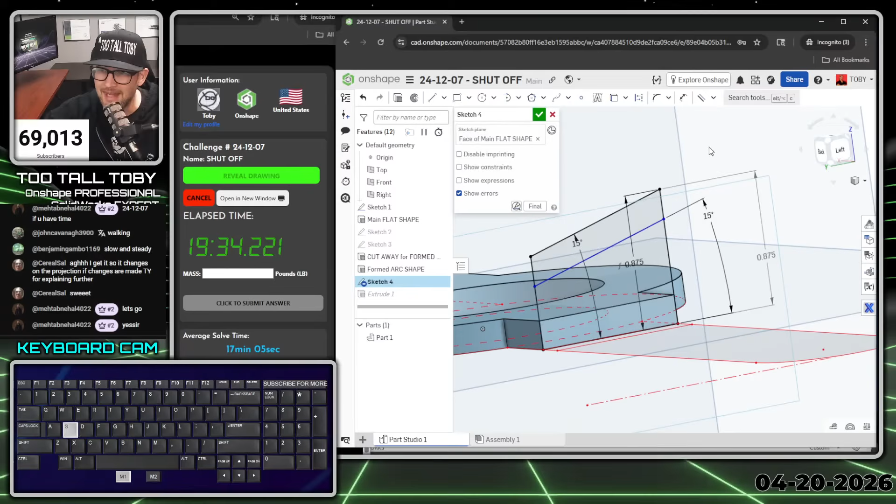Okay, so anyhow, so now let's see if I add a dimension between these two, between this line and this line, does that go over defined? It does, interesting, very interesting. It does go over defined. Okay, so when you do it with a parallel relationship, it doesn't, but when you do it with an explicit angle dimension, it does. That's really interesting.

Okay, well we did talk about that a lot earlier, and we talked about the idea that it's because when you have a dimension between two lines, you're kind of imposing a parallel relationship with that linear dimension between two lines. So that's interesting, not surprising, but it is interesting.

So now if we exit that sketch, now we've given ourselves a region here that we can extrude as a solid. So we can do extrude solid this region, and then that extrude is going to go up to vertex, and that vertex is going to be this vertex here. Okay, and we hit the green check mark. Then this is the one area of this model that gets a little bit sketchy because it just calls it out as a full round, right? Oh no, it does call it out as two 1/2-inch.

Okay, because these half-inch fillets are probably not going to match up very well... they're not going to match up perfectly. So if we did the fillet here and made this half-inch, then we go from this edge and this edge, and Onshape does blend them together into one face. That's kind of cool, it does match them up. No problem. I guess because we're looking down on it from the top, maybe that helps.

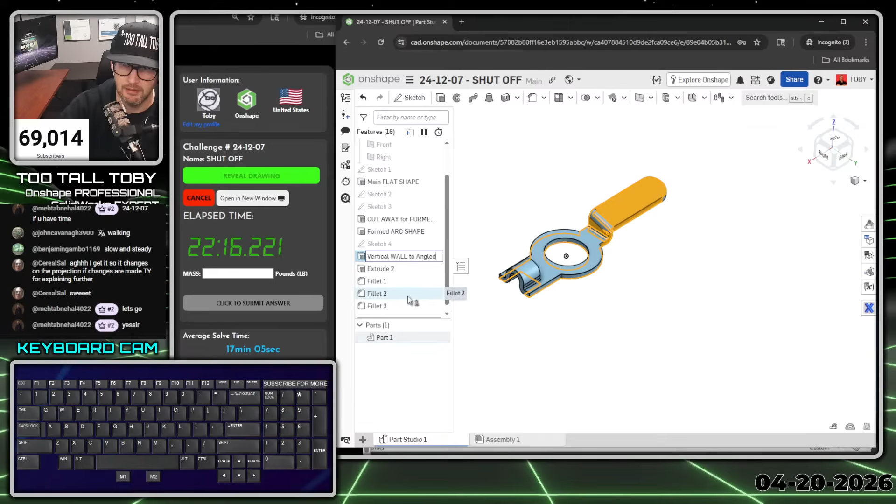So this one would be the vertical wall to angled handle, and then this one would be called angled handle.

And then the other thing we'd want to do here is right mouse button on the name of the part, go to assign material. This is going to come from the TooTallToby custom library of materials, and it's going to be 6061 aluminum, or 1060 aluminum, an older material from an older challenge.

And then I also like to right mouse button here and just say edit appearance and change the appearance. I think the customers always like it when you do this, make it kind of look like their part. It also helps you when you're looking at it in an assembly.

And so now we can click here, display mass and section properties, and we click on the part, and we're coming up with a mass of 0.191 pounds. Let's go back into the app and see if we got it correct. 0.191, and enter, and yes, we did it.

Yo, let's go. 1 for 1 all day. That's what I like to see.

So that is your tutorial for that 24-12-07. Thank you so much, Mehtab, for asking about that. That is awesome. Thank you, thank you, thank you.

And the CAD Queen is back in the chat. Welcome back, we see Kate is back here in the chat. Hello, hello, and welcome back. Awesome, thank you, thank you, thank you. Glad that workflow works good. I guess the ambiguity is it might look like the dimension on the vertices instead of the parallel lines. Yeah, yeah, that's true, yep.